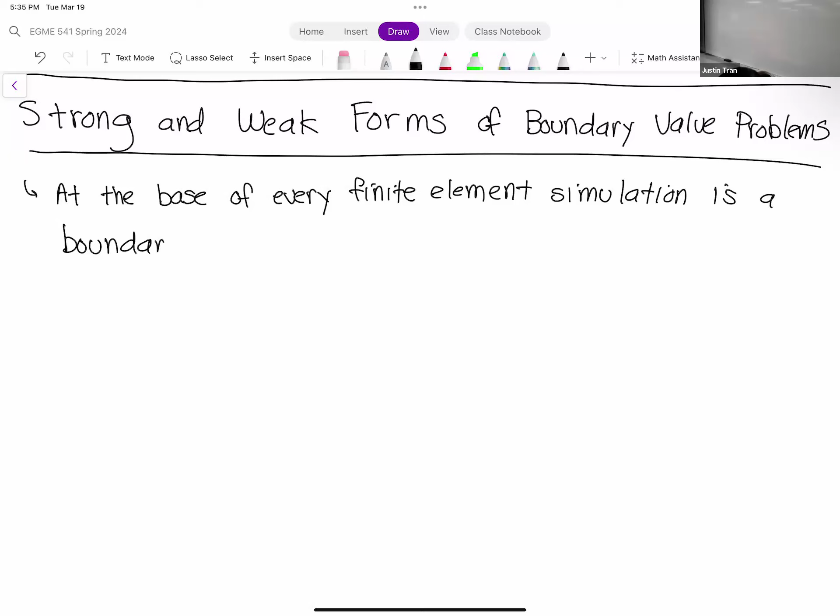And that includes our direct stiffness stuff too. It's just that for the direct stiffness stuff, we took a few shortcuts to get to things like the truss equation, the frame equation, things like that. Okay. So a boundary value problem essentially has three main components.

On the one hand, we have the geometry of the problem. So in a more traditional sense, in ANSYS, your geometry would be basically your CAD model, your digital representation of your geometry or the part that you want to simulate. The second component is the governing equations.

So whatever part you're interested in simulating, you want to simulate its behavior. And its behavior is often governed by some equations. More often than not, those equations are differential equations, oftentimes partial differential. And three is the boundary conditions.

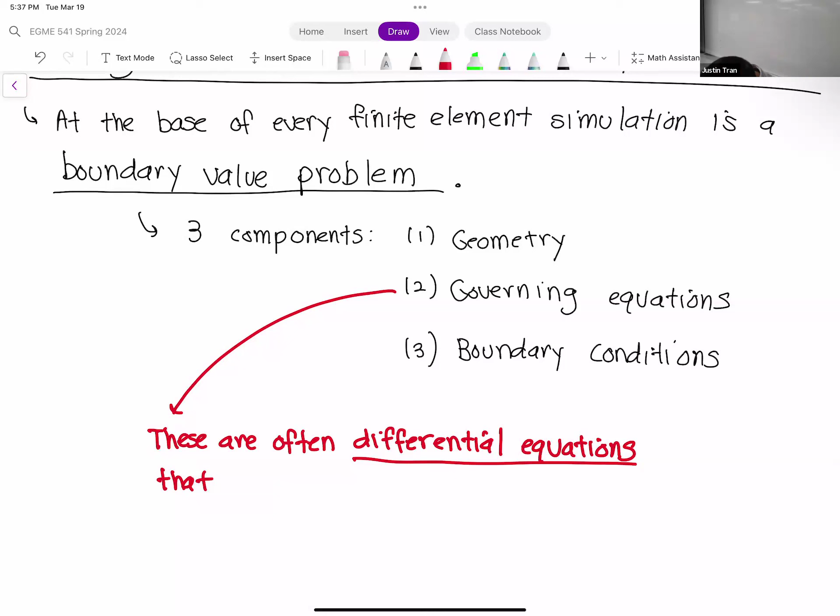The governing equations for a lot of physical phenomena, especially those that mechanical engineers deal with in their professional practice, are differential equations. And the thing with differential equations is that they are very difficult to solve, especially on an arbitrary geometry. So that was the main motivation of how finite elements came to be.

In the 17th, 18th century, scientists were starting to discover that a lot of the way that the world behaves can be governed by these differential equations. So they used first principles: conservation of mass, conservation of momentum, conservation of energy, things like that. And they developed really sophisticated equations. The problem is that they developed all these equations, but they didn't have a means to solve them on arbitrary or complex geometries.

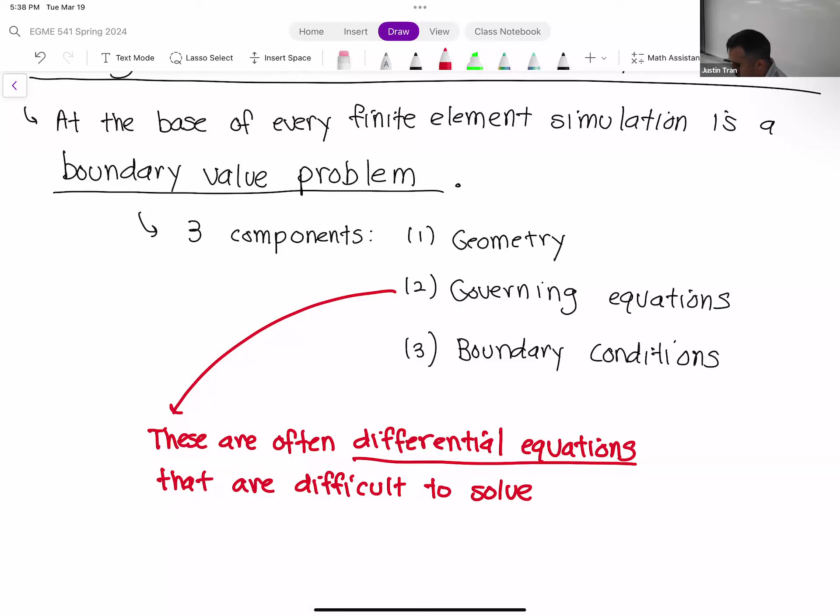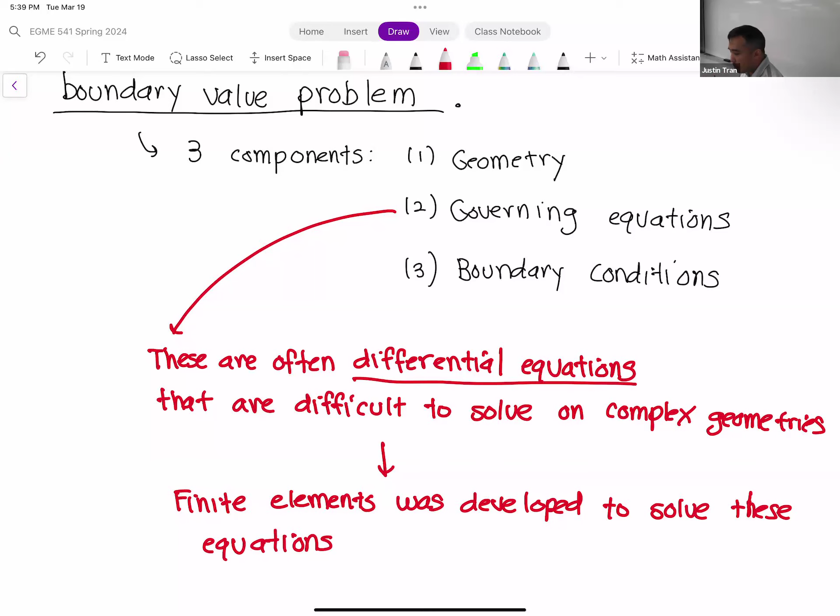So finite elements has its roots in applied mathematics. Finite elements was developed as a way to solve these differential equations. Through history, it's taken a lot of different forms, and now finite elements is very approachable, in the sense that it's widely applied in a lot of commercial software that a lot of people use, not in their everyday life, but in their professional life if they're an engineer.

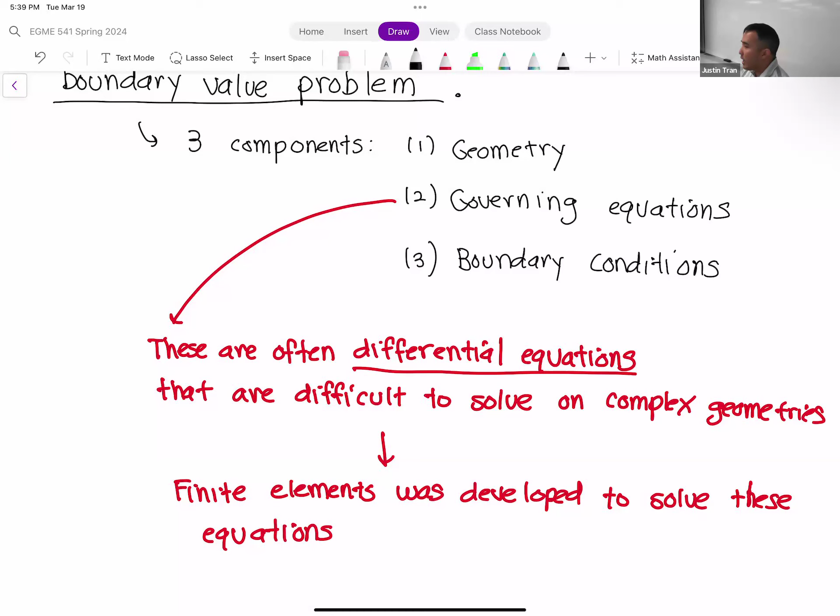So what we're going to be focusing on over the next few weeks is exactly this process of starting from a differential equation and how we obtain a finite element problem from that differential equation. Because that's really the piece that we've been missing.

Because through the direct stiffness method, we got a lot of practice in solving a finite element problem, right? Element stiffness matrix, assembly, boundary conditions, solution. What we haven't touched on at all is how we even obtain those expressions for the element stiffness matrices to begin with. All those element stiffness matrices that we've been working with for the truss elements, the beam elements, the frame elements, the springs, they have their roots in an underlying differential equation.

The reason we're doing this now is to show you that finite elements really is a very flexible framework. Not only can you solve structural problems with this, but you can also use it to solve thermal equations. Heat transfer is also governed by a differential equation, the heat equation. You can use it to solve for fluid flow; for fluids, we have Navier-Stokes. You can even solve electromagnetism. So finite elements extends far beyond the structural mechanics that we've seen in this class so far. As long as you have a differential equation, you can use finite elements to solve for its solution.

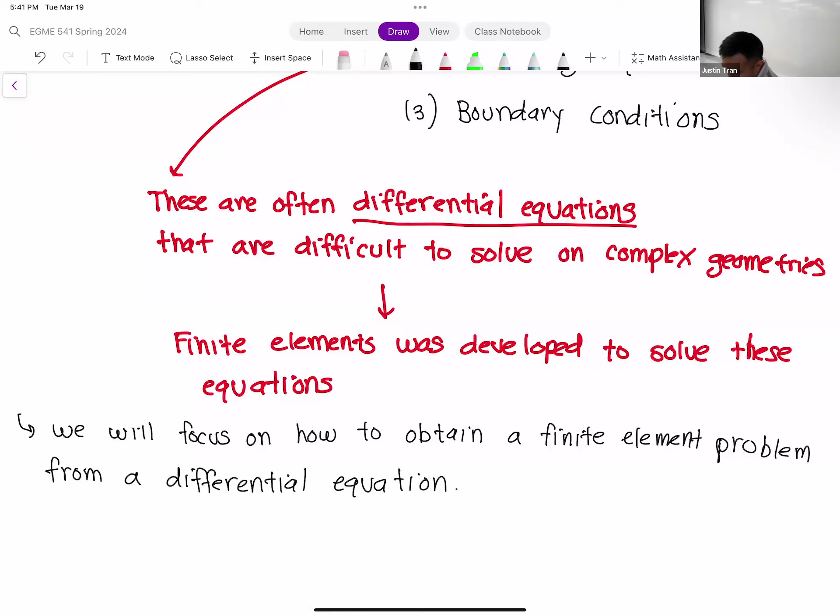And to do this, we need to introduce a couple new concepts. Right. So differential equations can often be put into several different forms to make it either convenient or less convenient to solve.

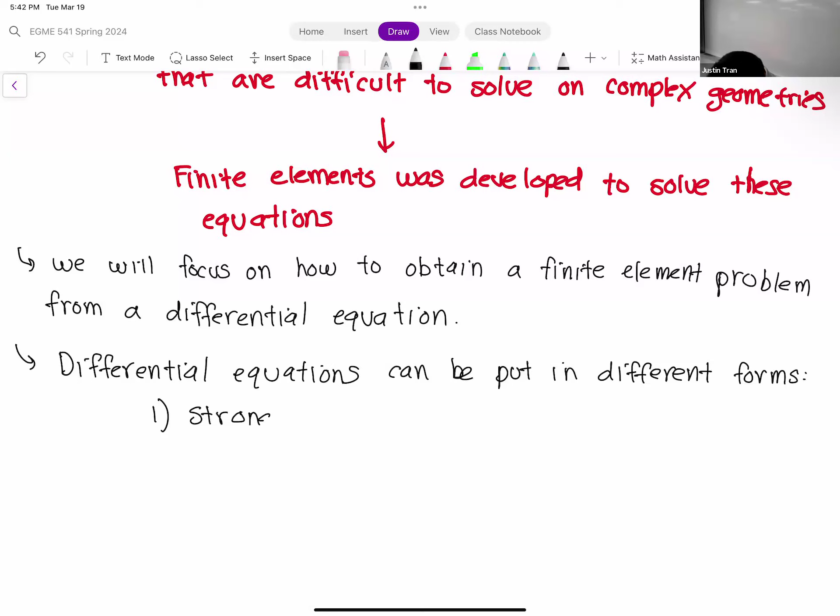We're going to present two forms today. The first form is called the strong form. The strong form is probably what you're most familiar with, the form of differential equations you've seen in most of your previous math courses. Or if you're taking 438, 538, that's more than likely what you've been presented with.

But we'll see that we can take the strong form and derive something called the weak form. The weak form of a boundary value problem, the weak form of a differential equation, facilitates our finite element solution. The weak form you've probably never seen before, because it doesn't really have a lot of applications outside of finite elements.

The plan for today is we're going to review the strong form, go over some solutions to second order linear differential equations, and then introduce the concept of the weak form and what that looks like. That's the motivation and purpose of where we're going for the rest of the class. Any questions on this so far?

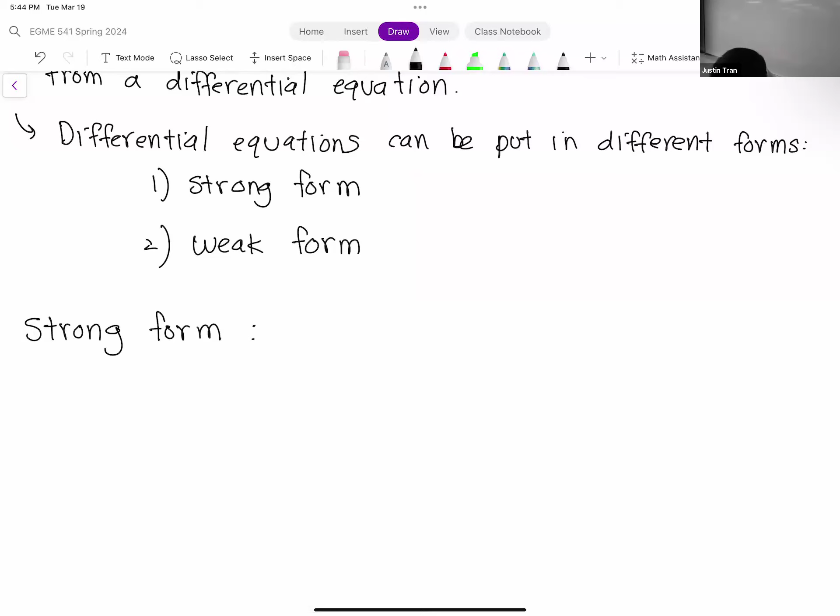Okay, so let's review some strong form. To illustrate this, I'm going to work on a very specific problem, which is 1D elasticity. Like I mentioned, the strong form is the more traditional, or more classical form for a differential equation.

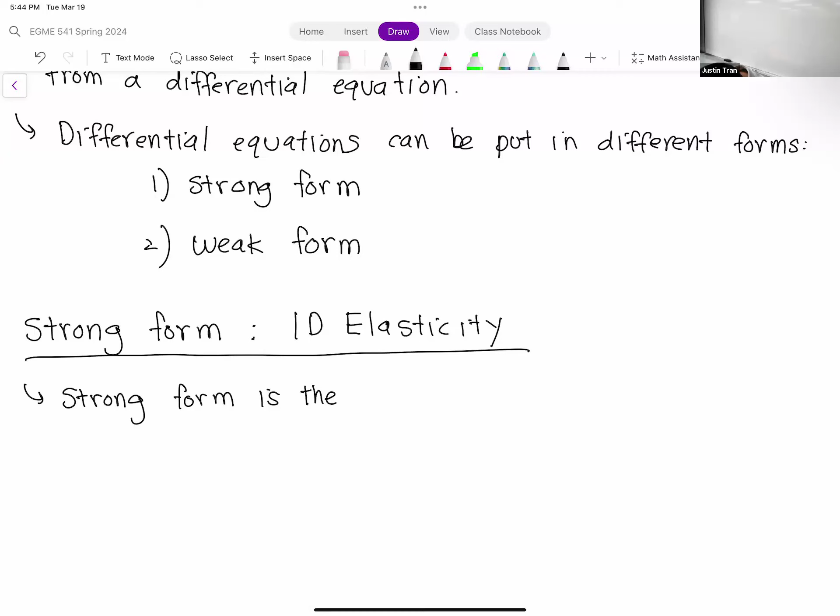The reason for that is because if you were to take your standard conservation law, conservation of mass, conservation of momentum, conservation of energy, when you apply those to physical situations, it just very naturally produces equations in this form.

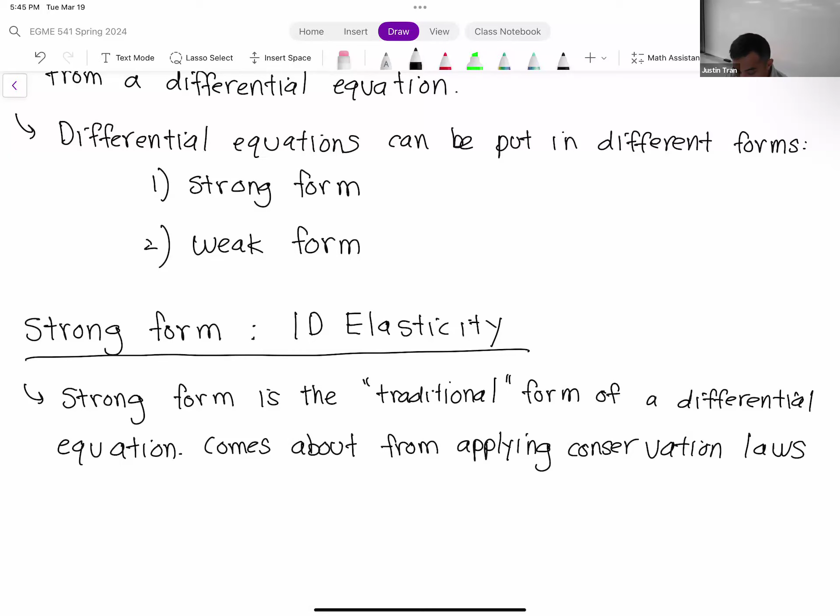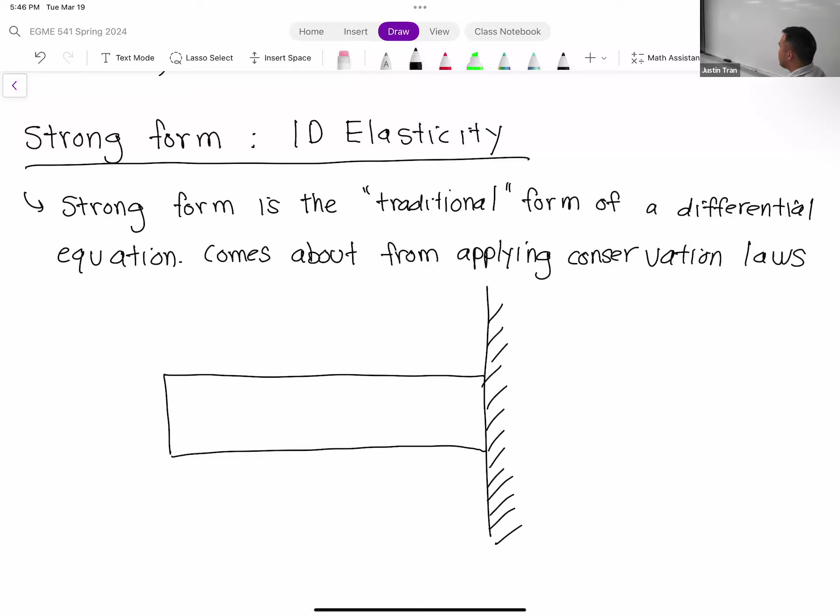I want to show you an example of this using 1D elasticity as the setting. So the 1D elasticity problem: let's say that we have a truss element like this. Let's fix it to the wall on the right side, and then let's apply a compressive stress on the left.

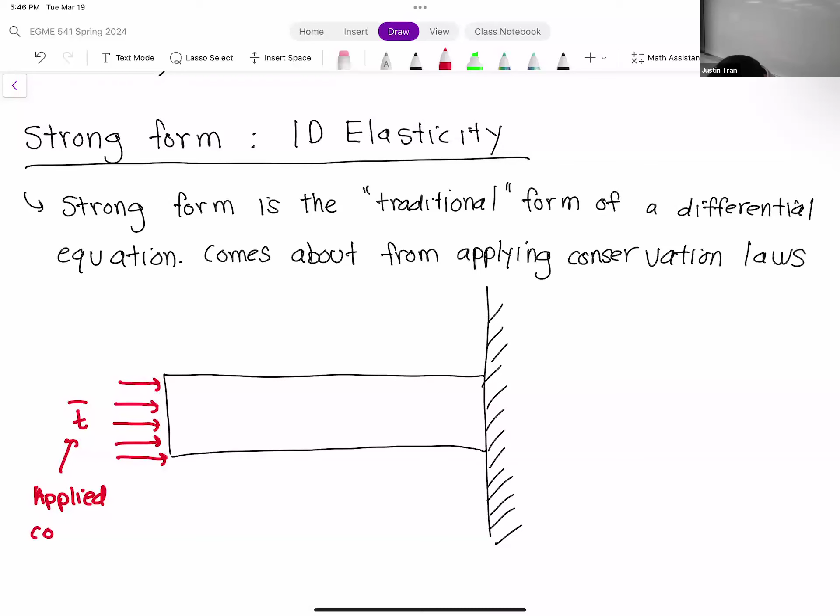The stress being applied on this side, just like that. This T here is an applied compressive stress.

So what we want to solve for in this case, or what we're interested in, is the distribution of displacement within this member.

Intuitively, what we expect is that if you take a structural member like this and apply a force to it, the entire structure, because of elasticity, is going to deform. We expect the structure to kind of squish close to the wall, very similar to what we had for ANSYS activity 2, except we're applying the force parallel to the structure instead of perpendicular.

So this function, or what we're solving for essentially, is a function u of x, where u of x is going to tell us how much deflection or displacement we're going to experience in the rod as a function of distance x.

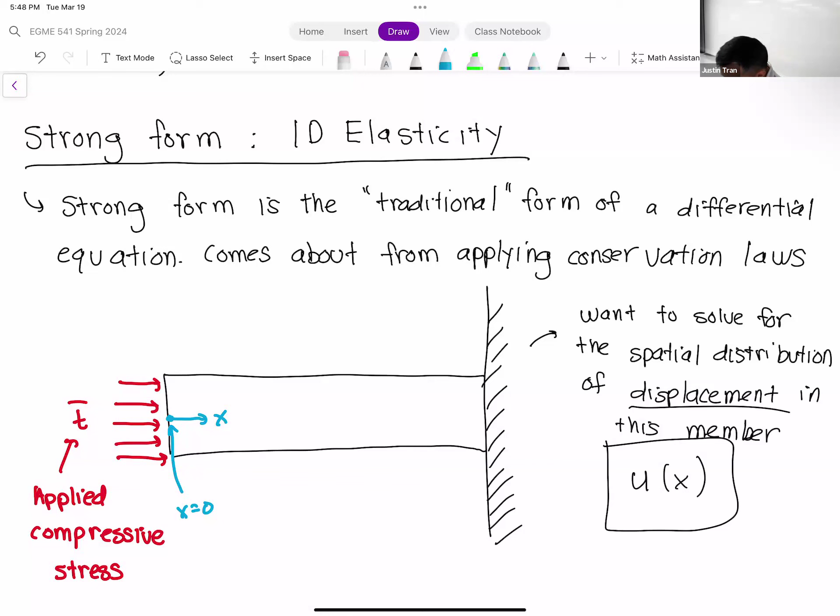What we want to solve for here is a continuous function, u of x, that tells us what the displacement is as a function of x. So let's say that this rod has a length L.

Additionally, one thing we haven't considered before is let's assume there's some kind of body force inside the rod. So in green right here, I have B of x, which is some body force. If you've never heard the term body force, it's a force that's felt throughout the entire volume, or on the interior, of the structure.

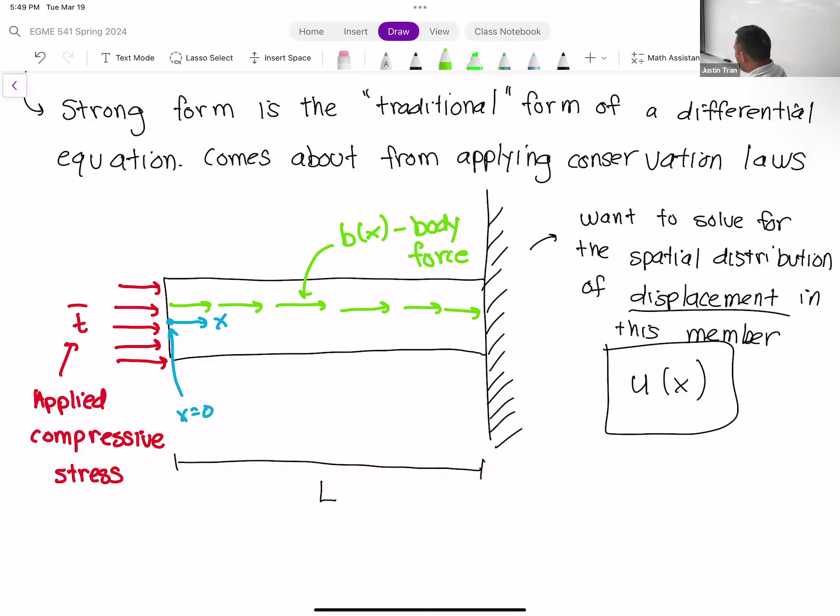There's a very classical body force that everyone experiences every day of their life at every moment, which is gravity -- the force that pulls you down towards the surface of the earth. That is what we call a body force, kind of an internal force that pulls you in a certain direction.

It might seem strange to have a body force that goes horizontally like this, but another classical body force is an electromagnetic force. Maybe this rod is electrified, or made of some metal, and there's a magnetic force pushing it inside or pulling it out. The exact origin of the body force isn't that important in this case.

We just have to account for its existence, just so that we can account for it in our equations. So that's the situation we're working with now. The first thing I want to do here is derive the equations. I typically don't do this in this class, but I think it's important to see it at least once, so that you can see the origin of a strong form.

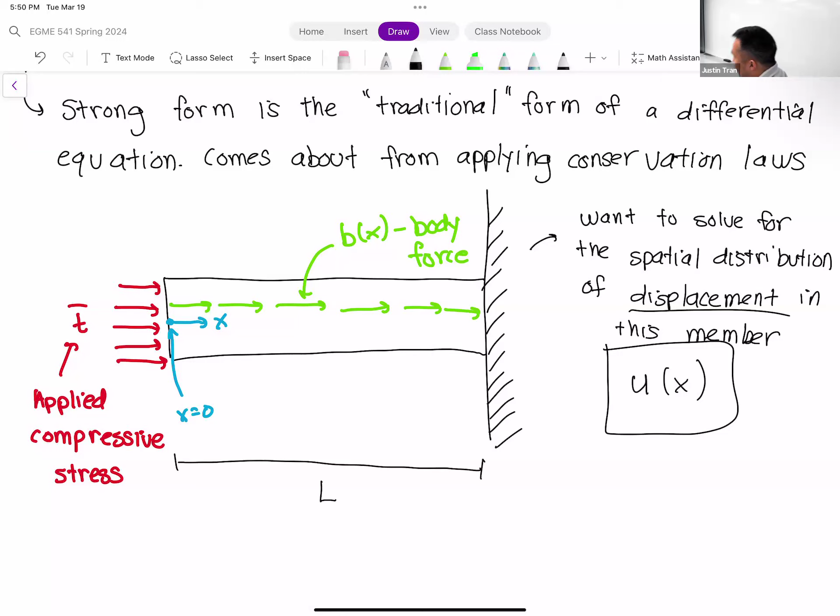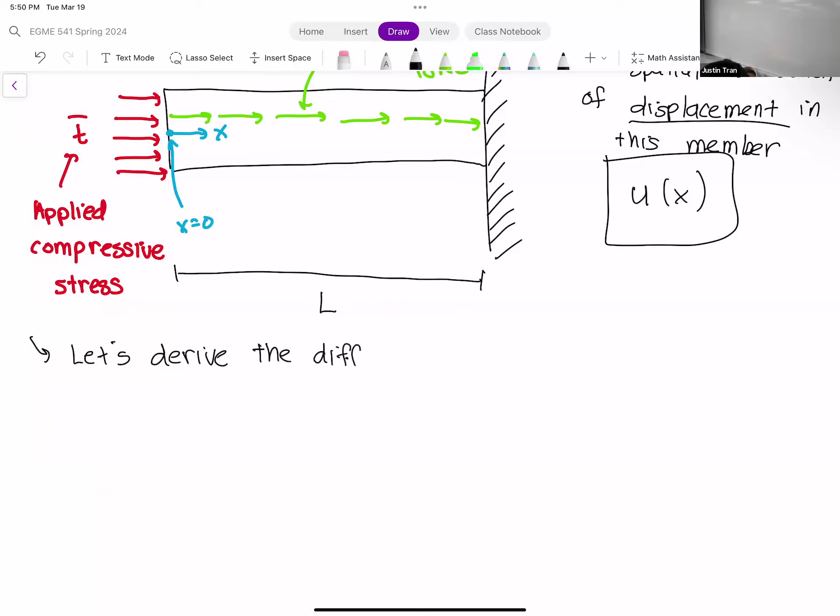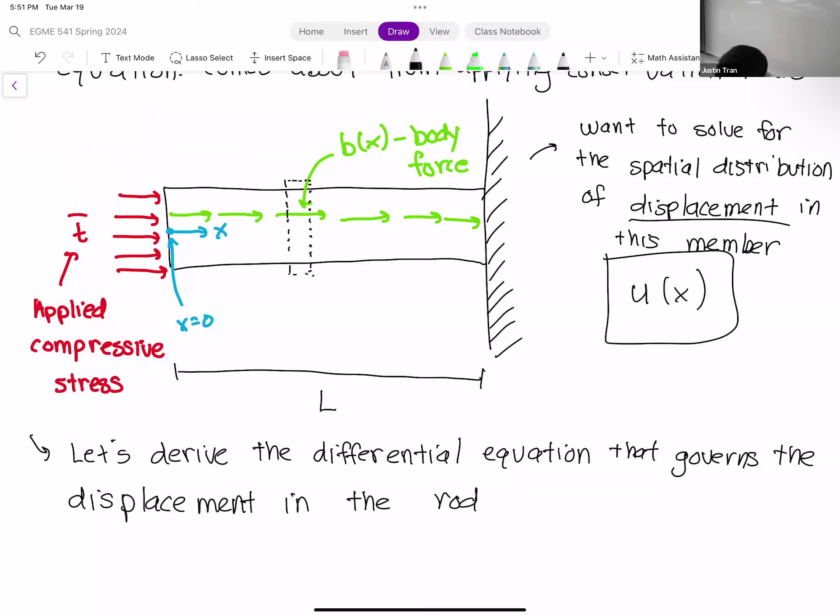So let's derive the differential equation that governs the displacement within the rod. To do this, let's take a small slice from the rod. I'm going to draw a dotted box right here. This box represents a small slice, and let's blow that up right here.

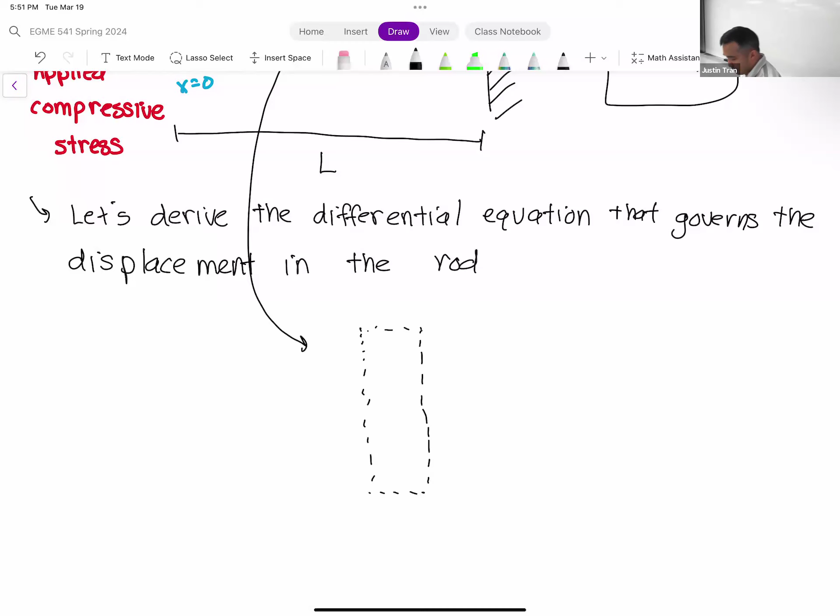This is a small internal slice within the rod itself. With elasticity and elastic equations in general, every single part of the rod must be in static equilibrium. Let's use that to our advantage here. Static equilibrium essentially means that if you sum up all the forces on this slice, the sum of the forces must be equal to 0.

So what are the forces on our slice here? Remember, we took this slice on the internal part of the rod itself. When you take a slice of a structure that's under stress, we've seen this in ANSYS: whenever you apply external forces to a structure, internal stresses develop. Think back to our first ANSYS activity, when we applied a force onto that plate, we saw a stress distribution within the plate. Same thing with ANSYS activity 2. We applied forces to that bike crank, and we saw the stresses develop on the interior.

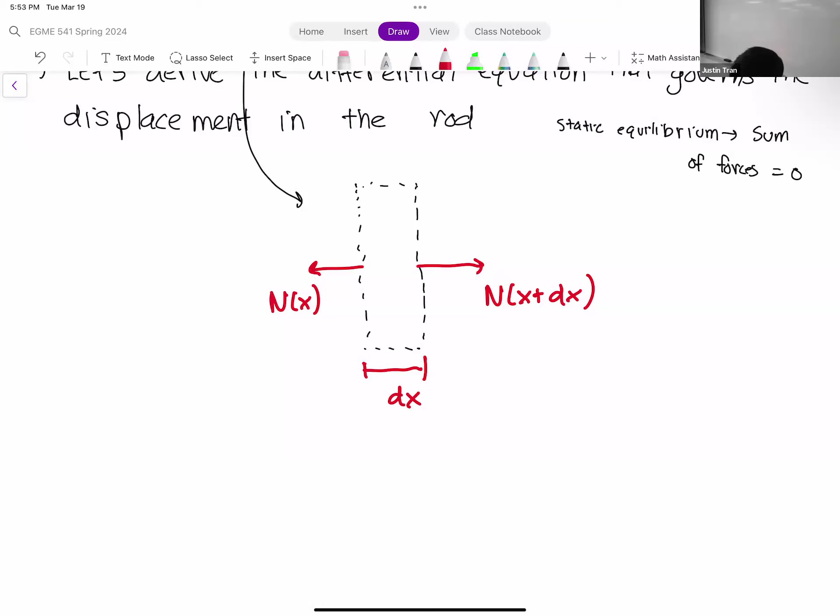I'm going to label 2 stresses here, 1 going in this direction and 1 going in this direction. On one side, I'll call that force N of x. On the other side, we draw a force N of x plus dx, where the width of the slice is dx. These are internal forces that develop within the member, mostly to keep the structure in static equilibrium.

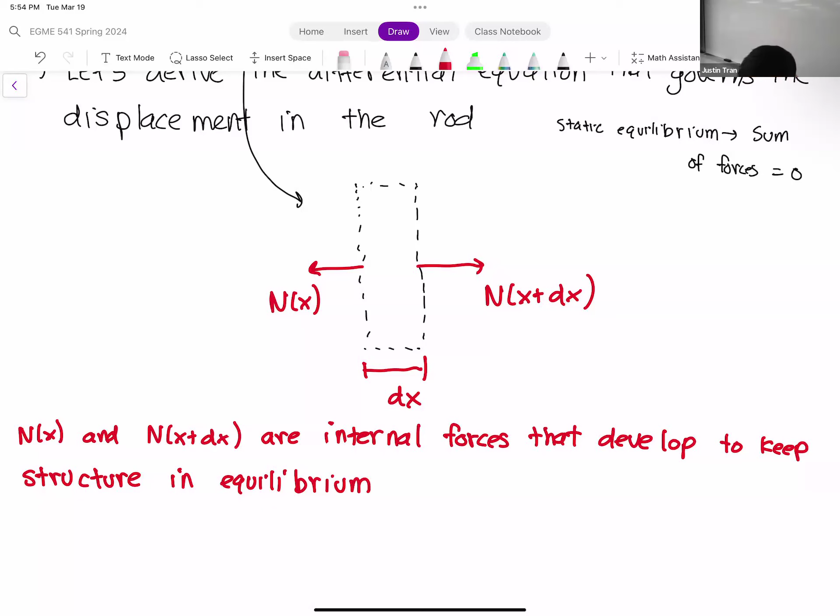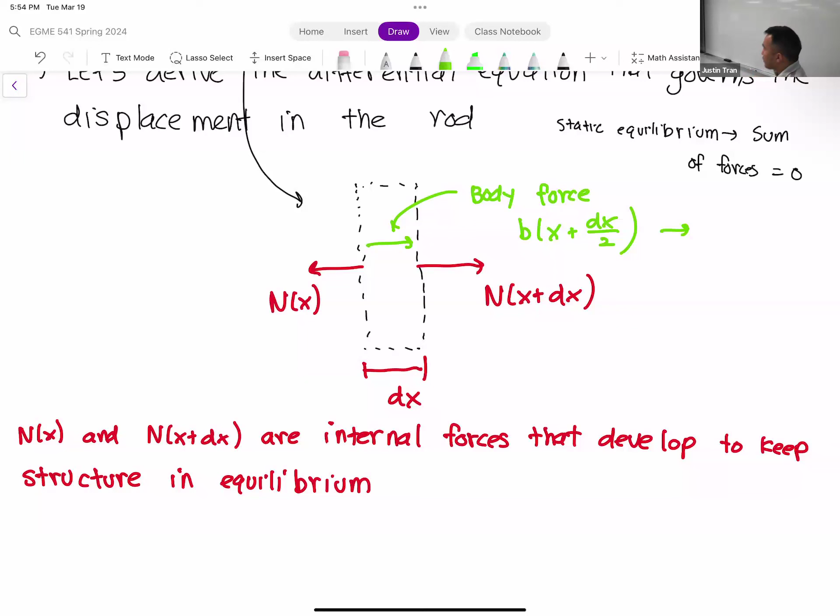So we have an internal force on the left and an internal force on the right. They may be different, which is why we have N of x plus dx. And then we also have the body force, B of x plus dx over 2. If you're curious about the units for this body force, it's a force per length. That's usually how body forces are defined: some force divided by a length, an area, or most commonly a volume.

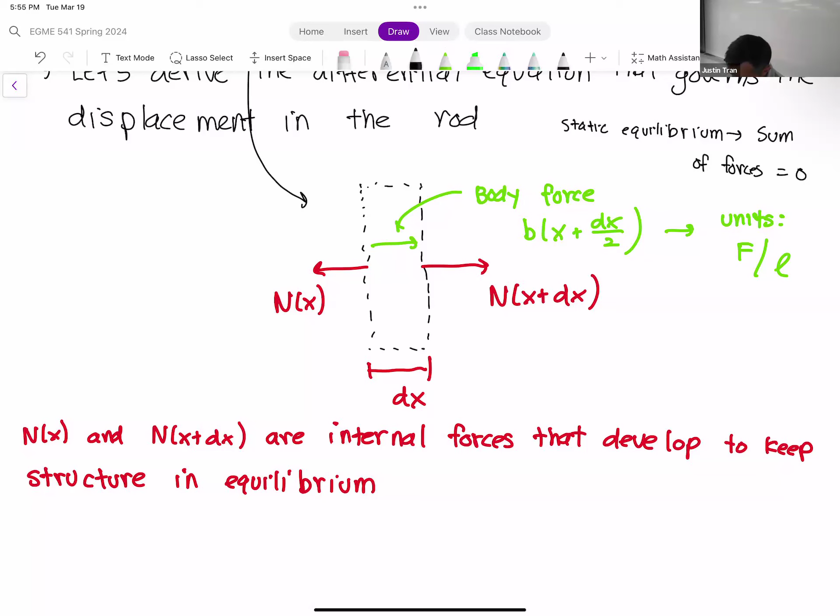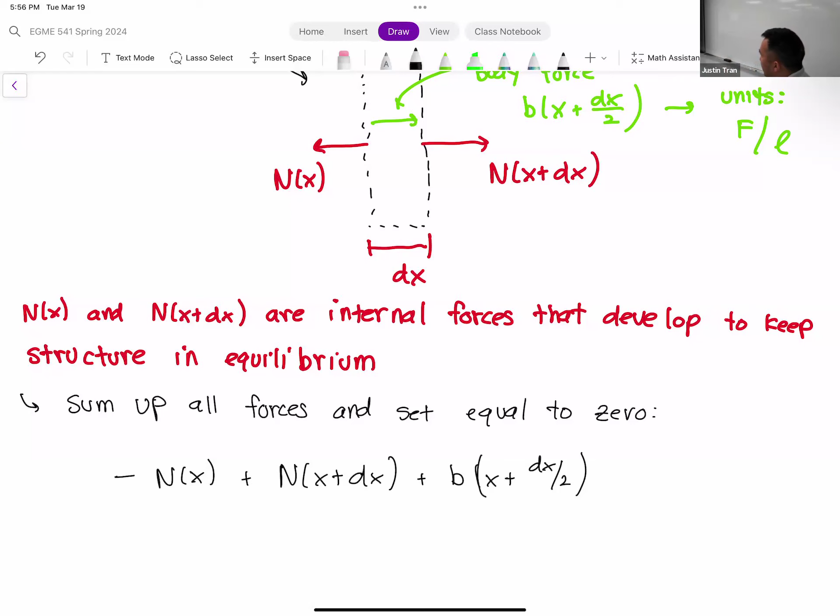Now we have 3 forces here, so let's sum up all the forces in this diagram. First we have N of x, a force going in the negative direction, so we have minus N of x. Plus N of x plus dx, which goes in the positive direction. Then we have our body force term, B of x plus dx over 2, and to transform it into units of force, we multiply it by dx.

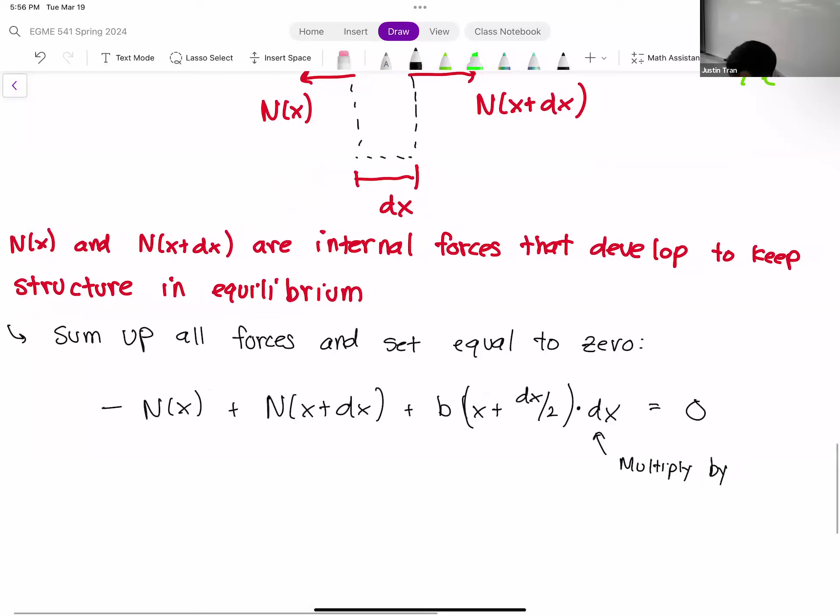We multiply by the length to get this into the units of force. From here, we're going to work on this equation algebraically a little bit. Let's divide the entire equation by dx and rearrange the terms. We have N of x plus dx minus N of x, divided by dx, plus B of x plus dx over 2, is equal to 0.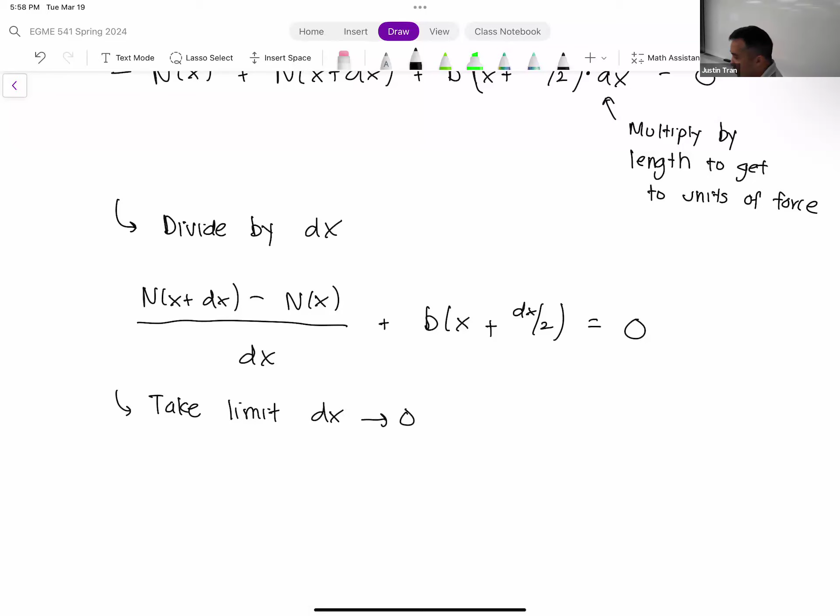So our first term there, our fractional term, looks very similar to a derivative. And in fact, we can turn it into a derivative by taking the limit. So we're going to take the limit of this expression as dx approaches 0. We're going to make our slice much, much smaller, so it's infinitesimally thick. What that does is take our first term and turn it into a derivative. So this is the instantaneous derivative right at that slice. So it's dN/dx, plus

Then we have our function b of x plus dx over 2, right? As we take the limit as dx approaches 0, this just becomes b of x, and this is equal to 0 here. All right. And so through that exercise, you can see that we basically took our structure, applied a very simple force balance, took a limit, and what we have here, before we even knew it, is a differential equation.

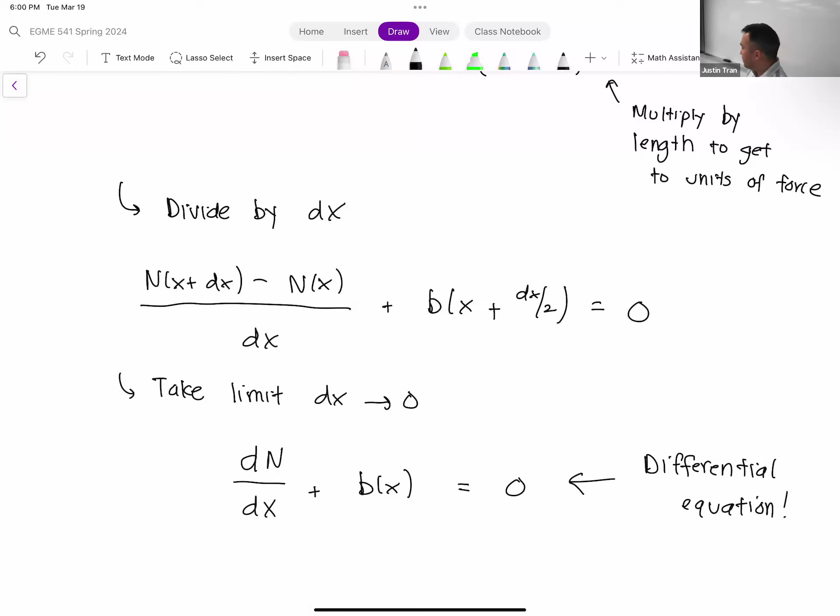So this differential equation governs the elasticity of our rod. What we can say here is that the derivative of the normal force, or internal force, with respect to x, plus the body force b of x, is equal to 0. All right. Any questions on this and how we got to this point? Okay. All right, so we have a differential equation.

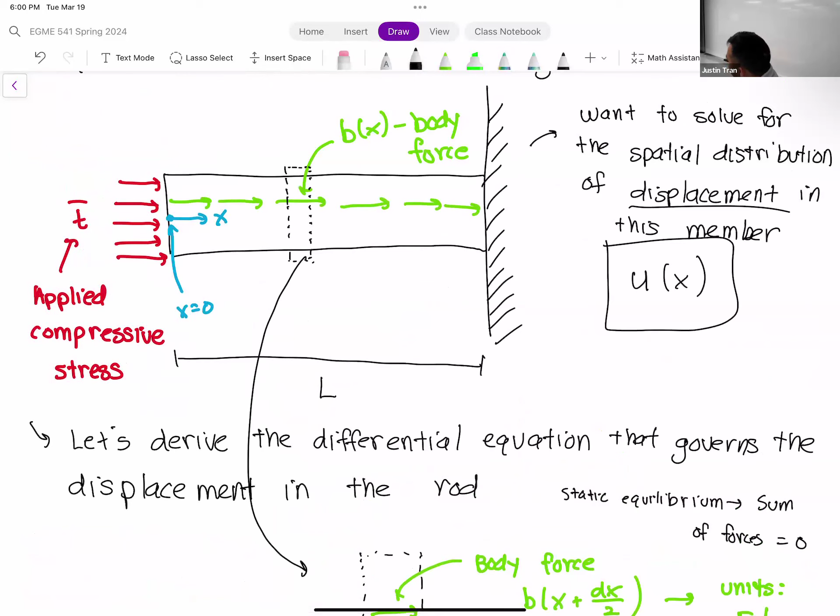It's not the most useful differential equation, because if you remember when we started this, what we're looking for is an equation to represent the displacement u of x. So let's work on this equation a little bit, because we were able to derive it from first principles. Let's see if we can massage this equation and substitute some terms in order to obtain our displacement. In particular, let's look at our normal force, or internal force N. This is a force that develops on the inside of our structure, right? So let's plug in for this.

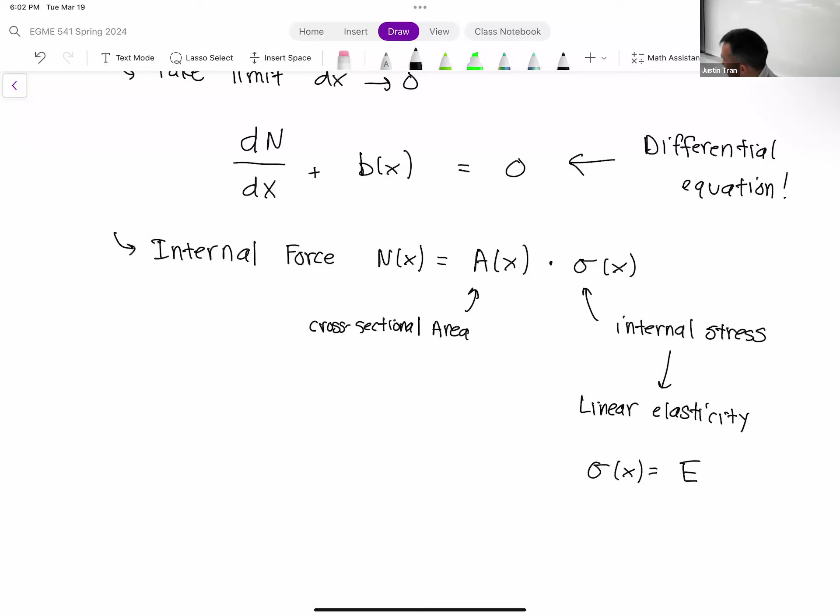Our internal force is the same thing as multiplying our cross-sectional area of our structure by an internal stress. Actually, let me label this area right here as the cross-section. Right, so we have a force equal to an area times a stress. The units work out. In particular, let's take our stress and plug in our typical Hooke's law, or linear elasticity. For stress, sigma of x is equal to E, which is the Young's modulus, times epsilon of x. So we have stress equal to Young's modulus times strain. That's our typical equation there.

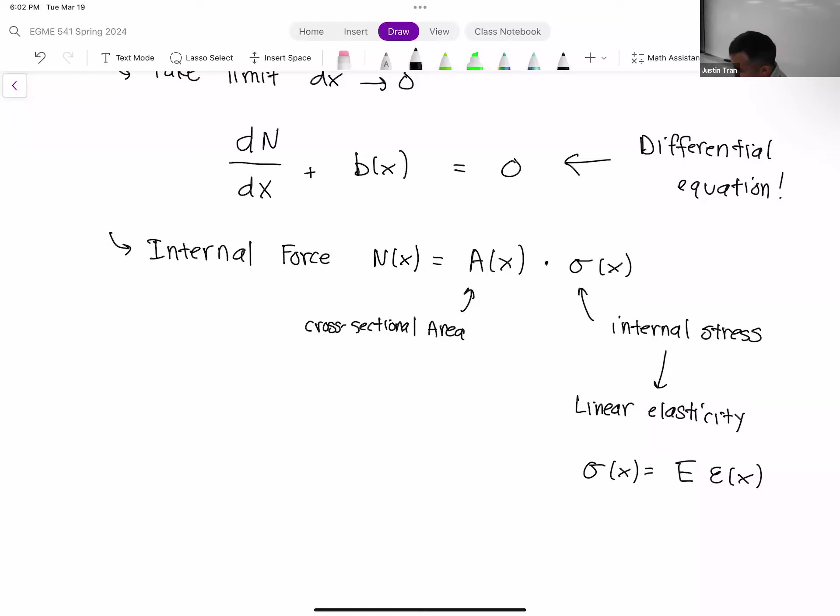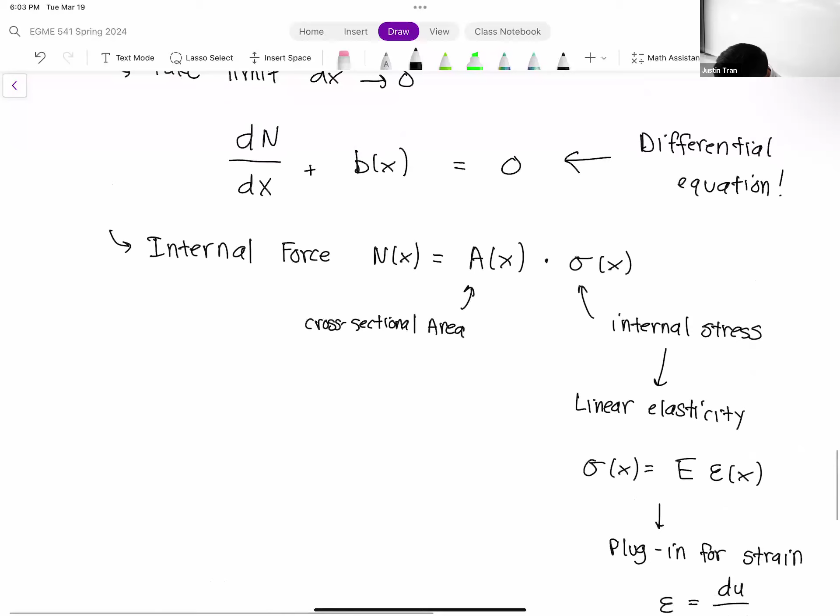And then from here, we're going to plug in for the strain, because we know that strain epsilon is equal to the derivative of the displacement, so we have du dx. That's just the definition of strain. All right. So if we plug all those in, then what we get is the internal force N of x is equal to area multiplied by E multiplied by du dx.

All right, so now that we have an expression for the internal force, let's plug this back into our differential equation. We plug that in and we get d dx of area. Remember, area can be a function of x, so the area can change. Let's say you have a tapered rod, or a rod that changes cross-sectional area. We can account for that in this equation. Multiplied by E. It's not really common for the Young's modulus to change, because usually you have a structure made of one material. But technically speaking, if you have some kind of weird composite material, then you can account for that here as well.

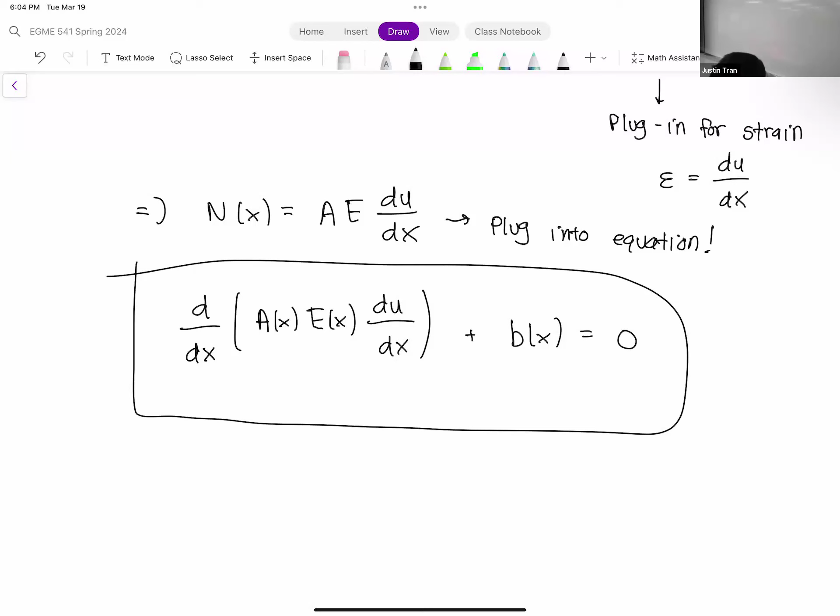Then we have our strain. So our strain is du dx. We are able to get u into our equations. We're able to get our displacement here. So that's really good. Then we add our body force term, b of x, and then all that is equal to 0. And this right here is our 1D elasticity equation.

All right. So just to dissect this a little bit, we essentially have a second order differential equation that we can use to solve for the displacement. How is it second order, you ask? If you look at this first term, you can see that we have an x derivative on the exterior, and then when we apply that to the interior, this becomes a second order equation, right? Of course, if we have terms where the area changes as a function of x, then that's going to make our equation more complex. But the total number of derivatives for our solution is 2. So that makes it a second order equation. We can now take this equation and solve for its solutions. But in order to do that, we also have to apply boundary conditions.

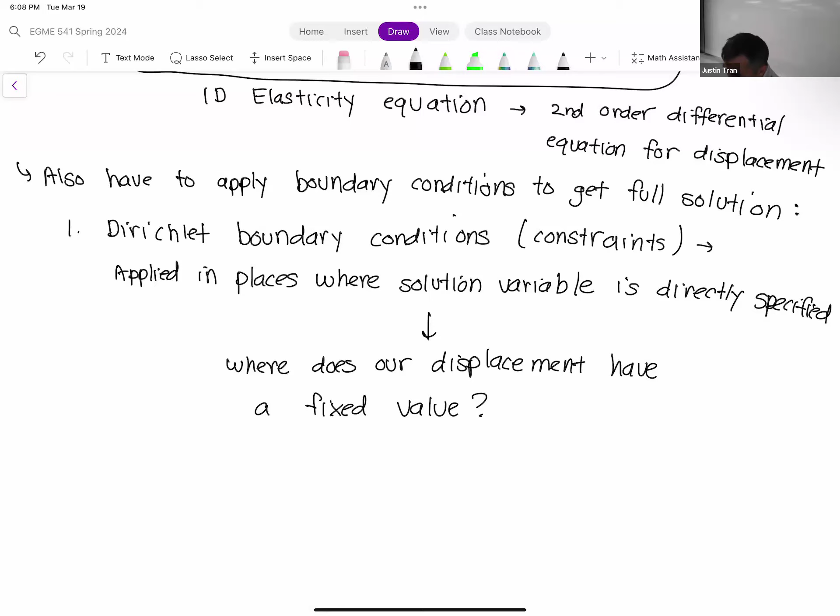Okay. So let's look back at our problem geometry and see kind of where those locations are. So if you go back to our problem geometry here, okay, we can see that our bar here, or our truss, or our structure, or whatever, is fixed to the wall on the right side. Okay. And what does fixed boundary condition mean? Fixed boundary conditions means that the displacement is going to be 0. In particular, because we have our coordinate system here, what we can say is that the displacement at x is equal to L is going to be equal to 0. Okay. We can say u at x is equal to L is equal to 0. Okay. So that's our Dirichlet boundary condition on one side of our equation.

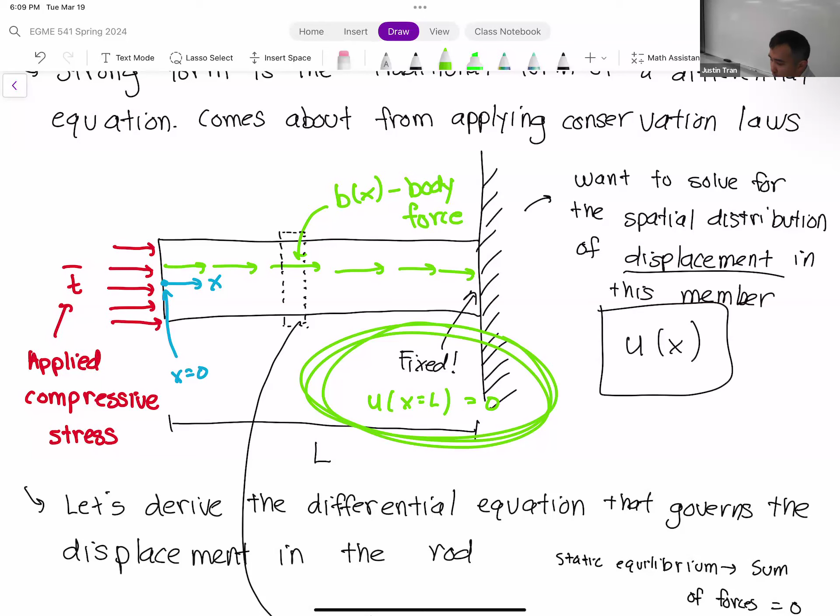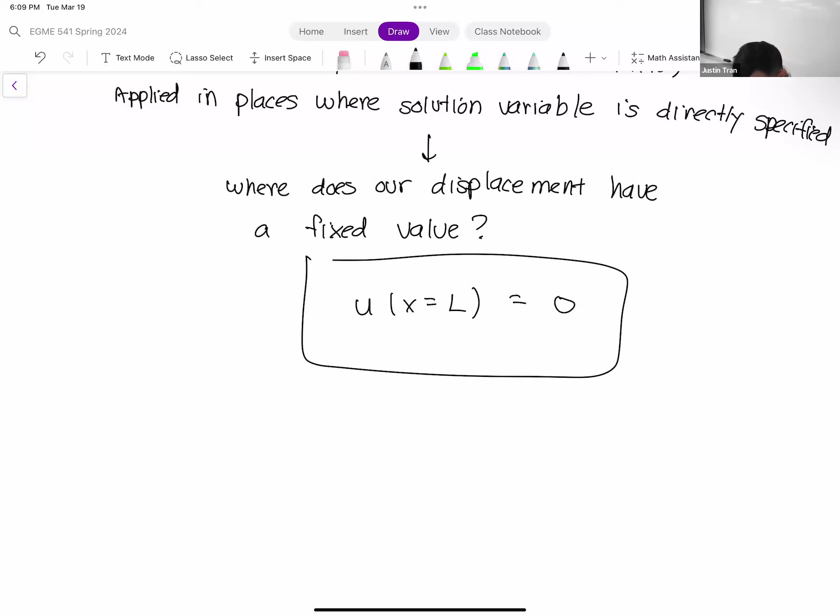Okay, so let's go back down here. And so our Dirichlet boundary condition is u at x is equal to L is equal to 0. Okay. We're directly specifying the value of the solution at that location, and we're directly specifying it to have a value of 0. Okay. So Dirichlet boundary conditions are pretty straightforward, and actually, they're more straightforward to apply in this form than they were in direct stiffness. Okay.

All right, so let's look at our Neumann boundary conditions. So these are traditionally our loads. Okay, so our Neumann boundary conditions, the way we kind of defined these before was that these are conditions that don't directly specify a solution value, but they do affect the solution. Okay. And what you'll see is that now that we're looking at the differential equation side of it, the Neumann boundary conditions are going to take kind of a more specific definition. Okay? Because this definition is okay, but it's kind of vague. So you'll kind of see what I mean here.

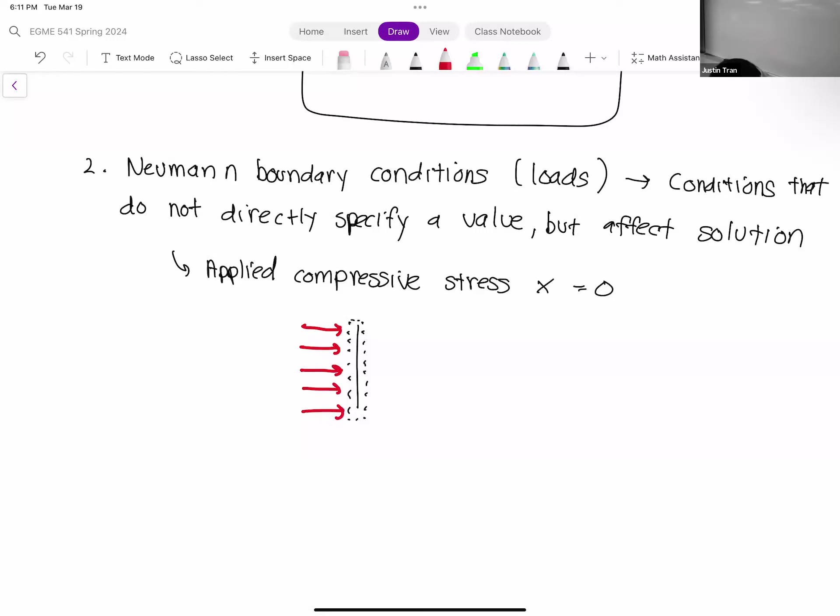Okay. So our Neumann boundary condition in this particular case is an applied compressive stress on the left side of the wall. Okay. In other words, we have an applied compressive stress at x is equal to 0. Okay. And so if we draw that out, and in fact, let me draw it like this. Let's draw a free body diagram here. Okay. So T bar there is our applied compressive stress, right? There must be equilibrium, right? So there must be equilibrium everywhere. And so to oppose this, we have N of 0, where N of 0 is the internal stress at x is equal to 0, or internal force at x is equal to 0. Okay.

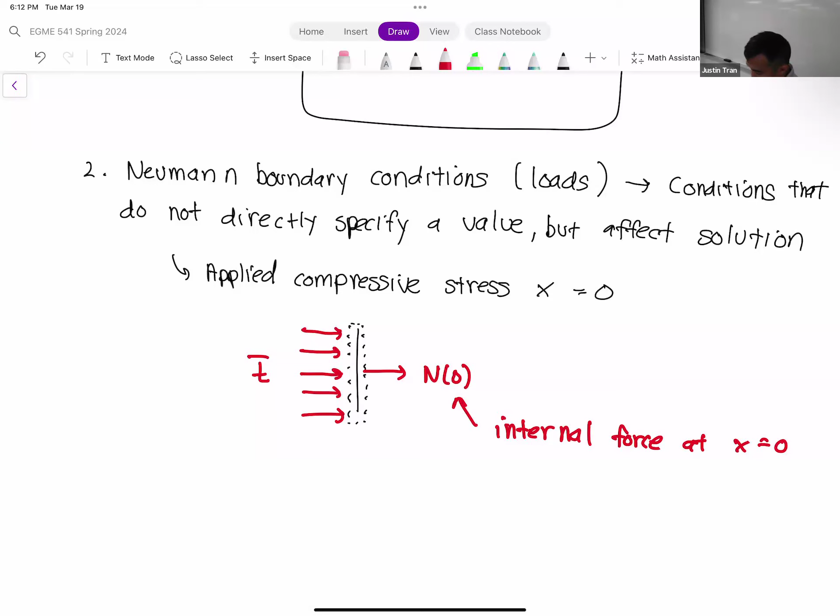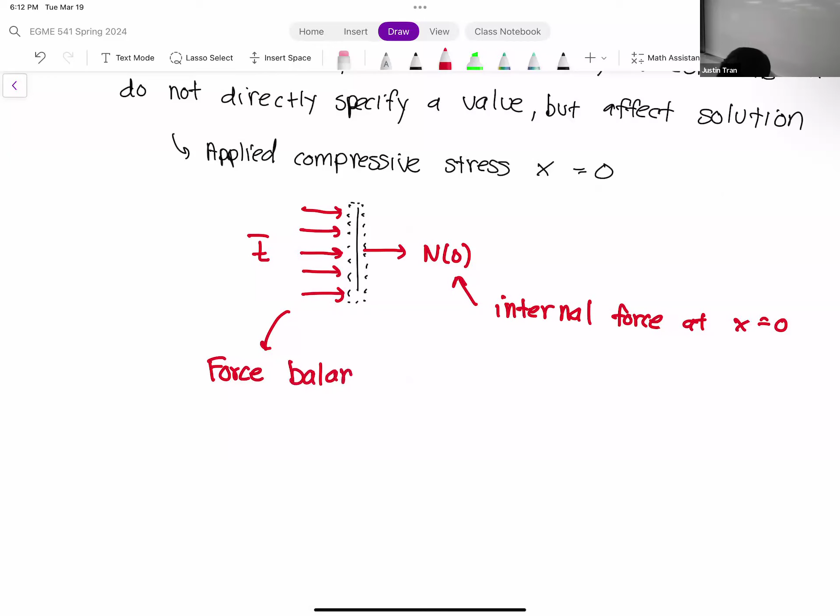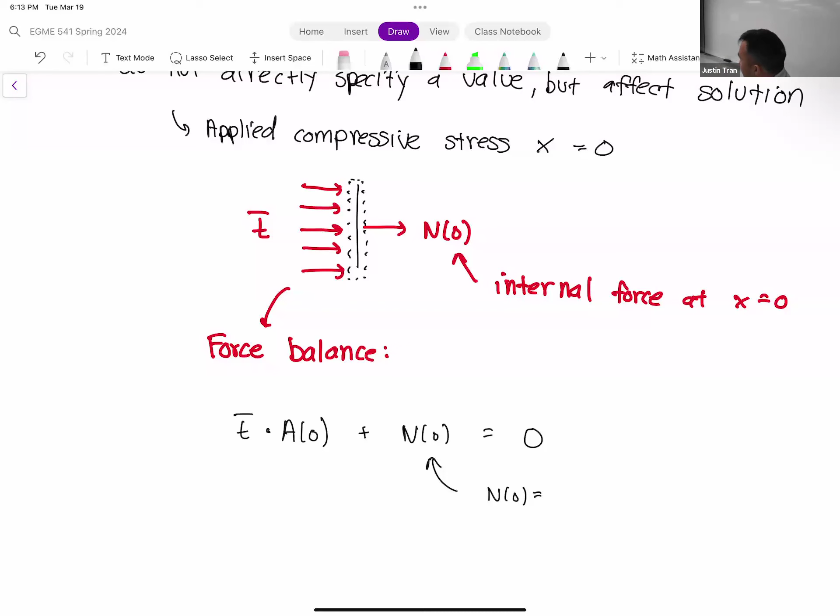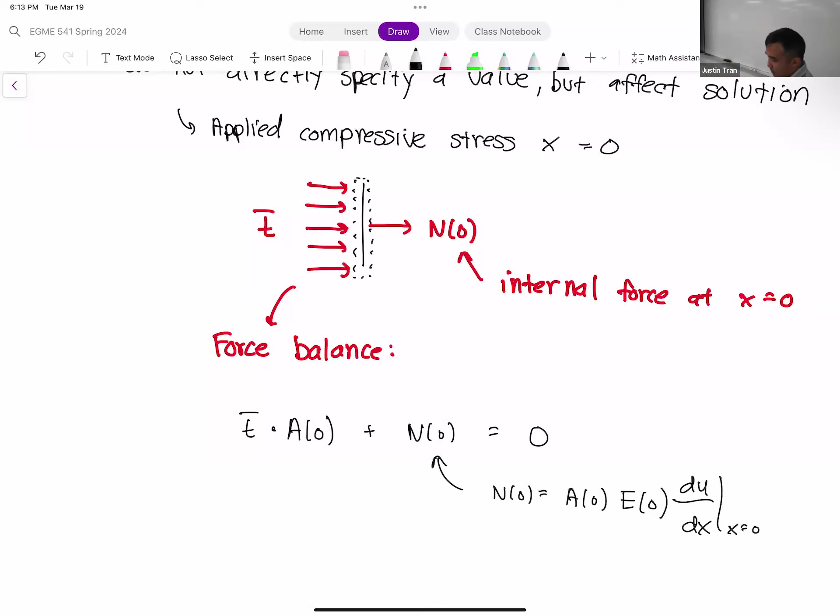All right. So let's make our force balance, right? So under our force balance, we have T bar, okay? T bar here is a stress, and so to get a stress into a force, we have to multiply by area, okay? So T bar multiplied by the cross-sectional area at x is equal to 0. This must be equal to, of course, you know, there's a sign change here, but you know, we'll assume that's all good. Okay. Actually, no, let's do this properly. Okay. We have T bar times A0 plus N of 0. This must equal 0. Okay. Let's plug in for N of 0. Okay. And so if we use our expression before, the normal force is equal to the cross-sectional area, A, multiplied by the Young's modulus, E, multiplied by the strain, du dx at x is equal to 0. Okay. And so we plug that expression in, we get T bar times A of 0 plus A of 0, E of 0, du dx at x is equal to 0. All that's equal to 0 there.

Okay. We have A of 0 in both terms, and we have this equation equal to 0, so we can divide the entire equation by A of 0, cancel that out. Okay. And so if we work on this algebraically a little bit, we move the T bar to the other side. What we get is quantity E times du dx. Okay. Both of these are evaluated at x is equal to 0. These are going to be equal to minus T bar. Okay. So this right here is our Neumann boundary condition.

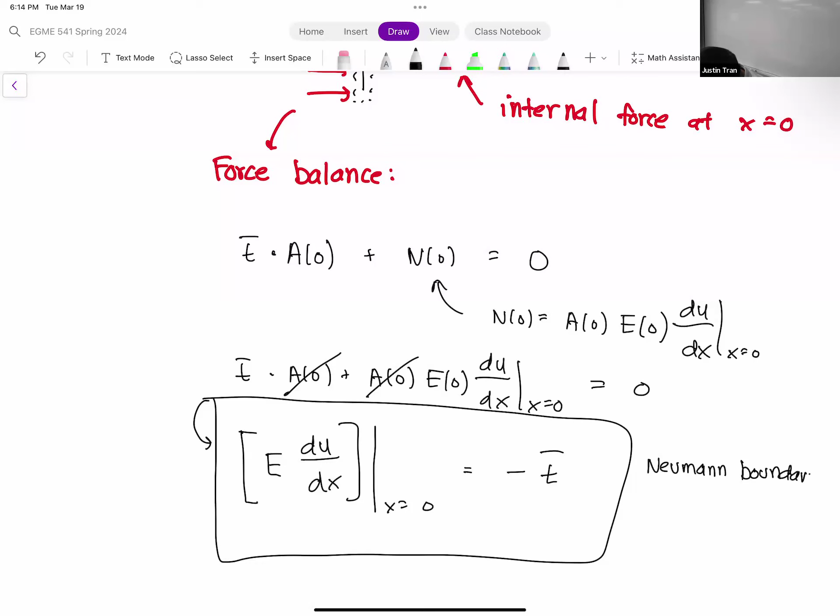Okay. Any questions on how we obtain that result there?

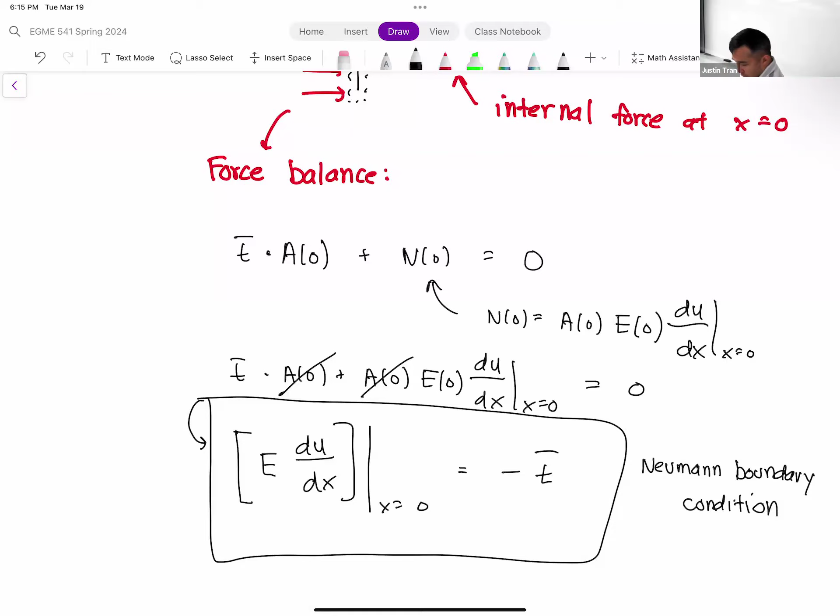One thing I want to highlight here, and it kind of expands our definition of Neumann boundary condition a little bit, is that this boundary condition here involves the derivative of our solution.

Whenever you mention a Neumann boundary condition or a load type boundary condition, mathematically what's happening is a relationship between the derivative of the solution and some kind of applied force. That's the more precise definition of Neumann boundary conditions, that it involves the derivative of the solution in one way.

Now that we've stated the mathematical form of the boundary conditions, along with the governing differential equations, we are ready to state the full strong form of our equations.

The strong form is comprised of three different equations, all coupled together. On one hand, we have our governing differential equation, which governs the behavior of our structure throughout its member. That was d/dx of E times A du/dx plus b of x is equal to 0. We call this our governing equation.

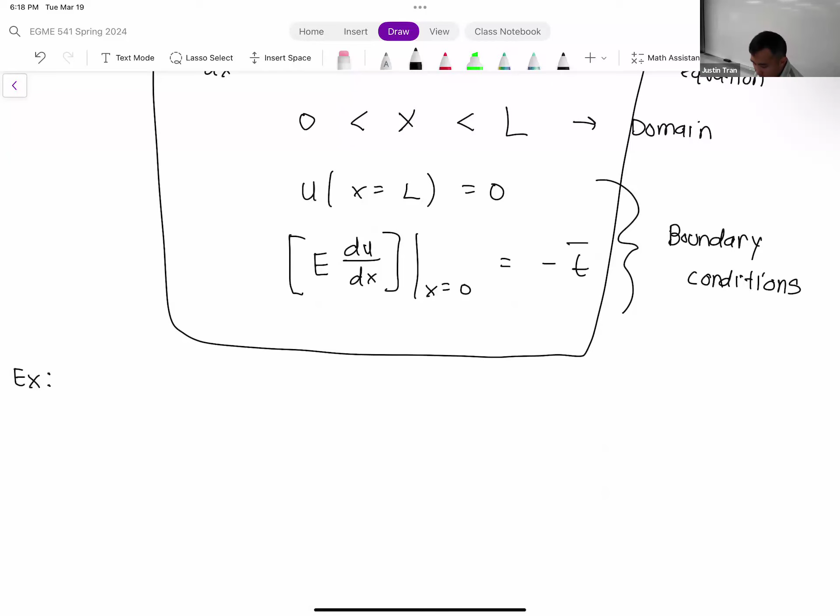Let's do a very simple example. Let's consider the following structure: let's say we have a bar here, and we'll say it's fixed on one side.

Sounds like a party.

On the other side, we're going to be applying a pressure force. This geometry is a little bit different than what we had previously. Previously we had the fixed constraint on the right side; this time we have the fixed constraint on the left side. Last time we had the pressure boundary condition on the left; this time we have it on the right. But we can still apply the same methodology here.

Let's say that the total length of this structure is 1 meter. We need values for the Young's modulus, so the Young's modulus here is 100 kilopascal. And the cross-sectional area is 0.1 meters squared.

With this information, let's solve for the distribution of displacement within the structure — essentially solving for u of x.

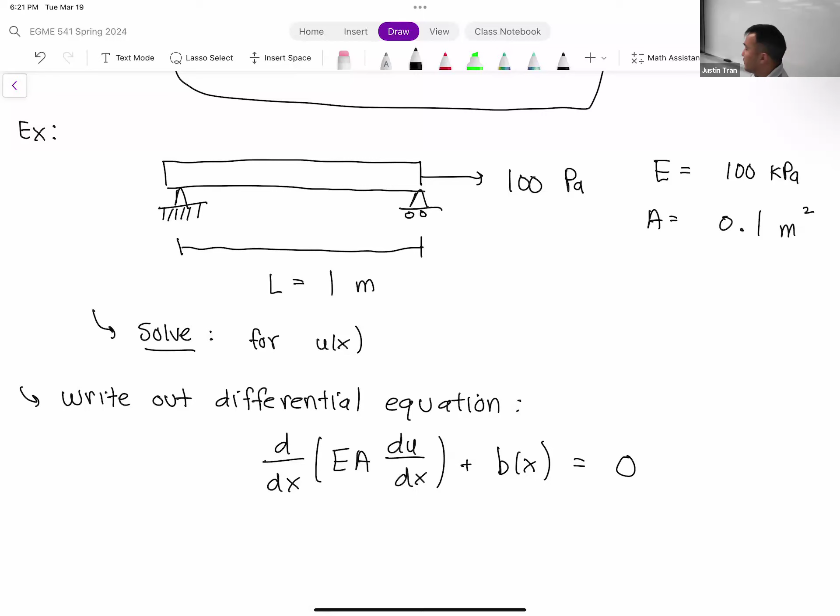This is our most general form of this differential equation, but a lot of times you can simplify it based on your specific problem. In this case, we don't have any body force — the problem didn't mention anything about electromagnetic force. Our rod here is horizontal, so there's no gravity force, at least not in the x direction. So we can say this is equal to 0, no body force.

The other thing we can say is that the Young's modulus and the cross-sectional area are constant in this case. If you look back at the problem, E and A have a fixed value. If those were functions of x, or if those were going to vary, then we'd have to take their derivatives, but since these are constant, we can pull them out of the derivative.

If we do that, then our differential equation here is E times A, times d/dx of du/dx, which is a second derivative — so this is d squared u dx squared, and that's going to be equal to 0.

We can simplify this a little bit more. We know that since E and A are non-zero, we can divide both sides by that. Divide by EA, divide by EA. This, of course, is just going to cancel out EA. And so our differential equation actually ends up simplifying quite a bit. We have d squared u dx squared is equal to 0.

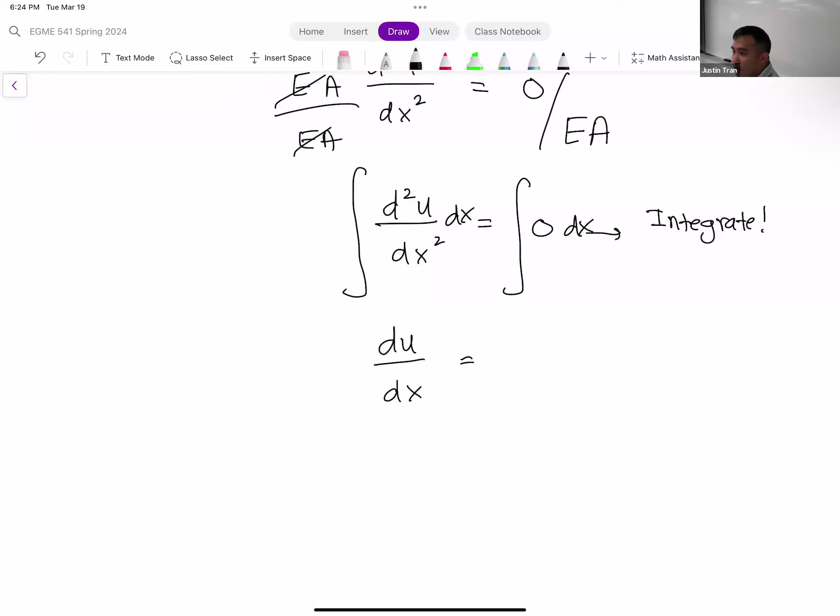On the right-hand side, we have the integral of 0, which is just 0. But since we are doing an indefinite integral in this case, our integrals don't have any bounds, we need to add an arbitrary constant. And so du dx is equal to, we'll call that constant c1. So this right here is an arbitrary constant due to the indefinite integral.

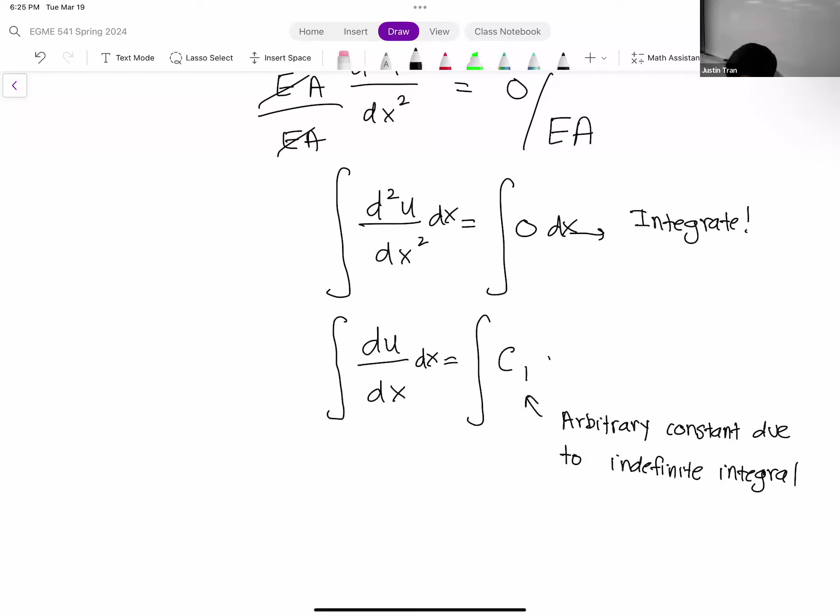All right, so we're going to do that again because we don't quite have u of x yet. So we're going to apply another integral here with respect to x. And so on the left-hand side of this expression, we're going to have u of x. And then on the right-hand side, we have c1. The integral of a constant is just x, so we have c1x. And then just like we did in the first step, we're going to add an arbitrary constant, c2.

I'm starting to get competitive, I feel like I'm competing against what's happening out there.

All right, so that's our general solution. For cases where you don't have a body force and you don't have a varying cross-sectional area or varying properties, your solution is very simple. You can just simply integrate and get your solution like this. Any questions on this so far? Okay. All right, but we're not quite done yet.

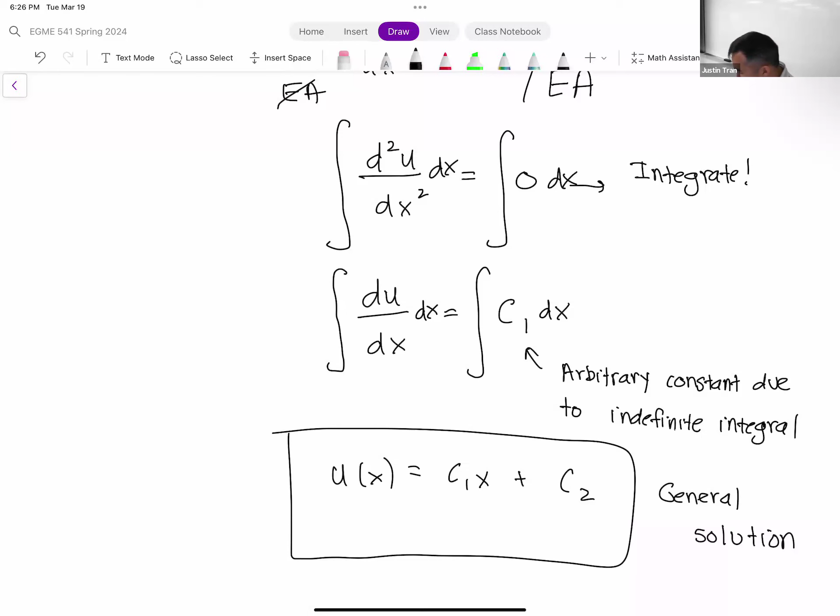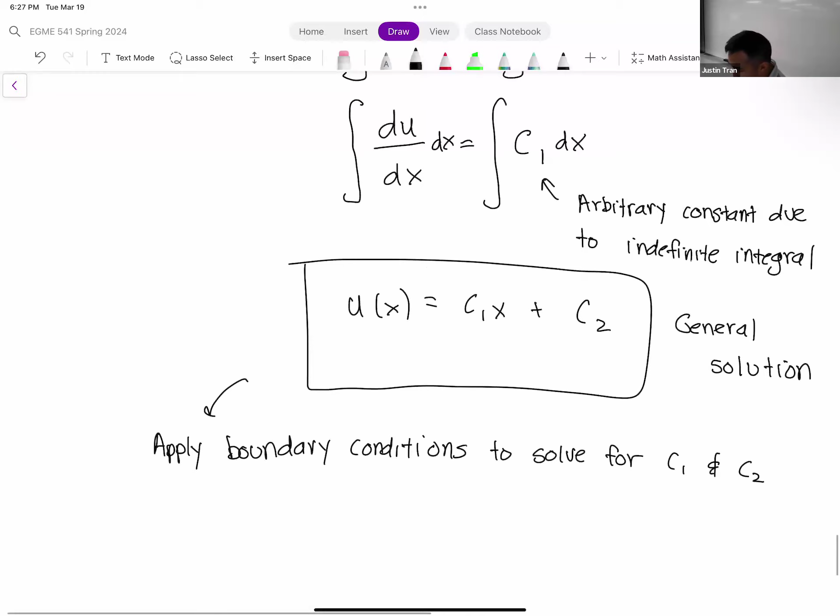In order to get our full solution here, we have to apply our boundary conditions. The reason we're applying the boundary conditions is we need to solve for values for C1 and C2. So let's go ahead and do that. We have our two boundary conditions here. The first one is that u of 0 is our Dirichlet boundary condition. Since we had a pin support on the left-hand side of our bar, that means u of 0 has to equal 0.

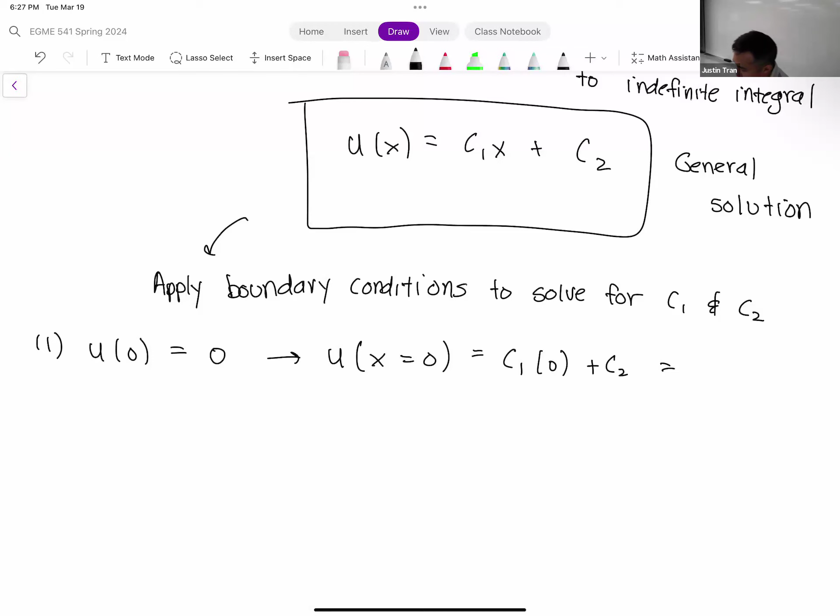So let's go ahead and apply this boundary condition. Let's take our general solution, u of x, and plug in x is equal to 0. Everywhere we see x, we're just going to plug in 0. So we have C1 times 0 plus C2, and according to our boundary condition, this is equal to 0. The C1 times 0 is going to cancel out, and what we get from here is that C2 is equal to 0.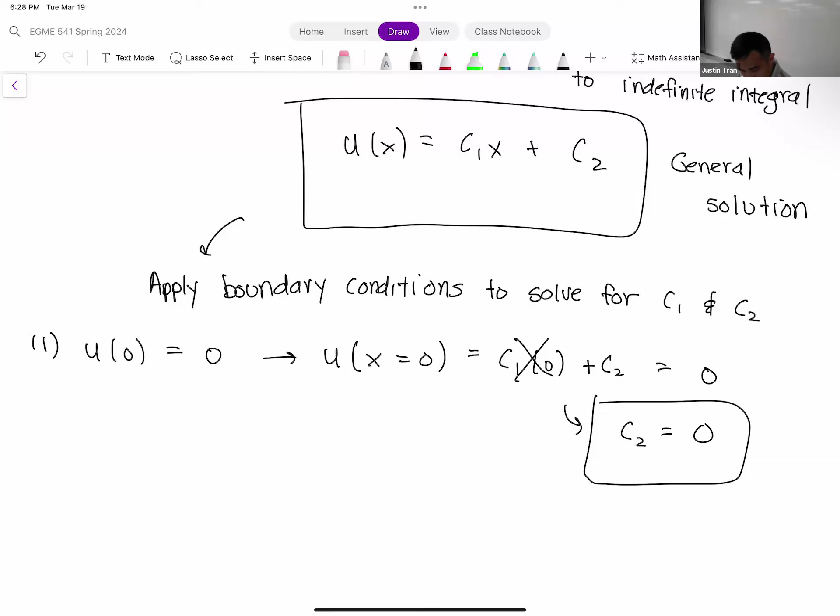Then we have our other boundary condition, which is our Neumann boundary condition. This boundary condition is applied on the right-hand side. And so we're going to flip the sign of our typical boundary condition, which is E du dx. Our Neumann boundary condition here is applied at x is equal to L, so we're going to plug in x is equal to L there. And this is going to be equal to, normally it's minus t bar, so that was our boundary condition before, but since our force here is tensile, we're going to flip the sign. So this is going to be equal to a positive t bar. Our t bar in this case is 100 Pascal.

All right, so let's go ahead and plug in. To get du dx, we have to go back into our solution here. We know that du dx in this problem is equal to just C1. That's what we obtained midway through our solution. And we multiply that by E. E here is 100 kilopascal. We multiply that by our solution derivative, which is just C1.

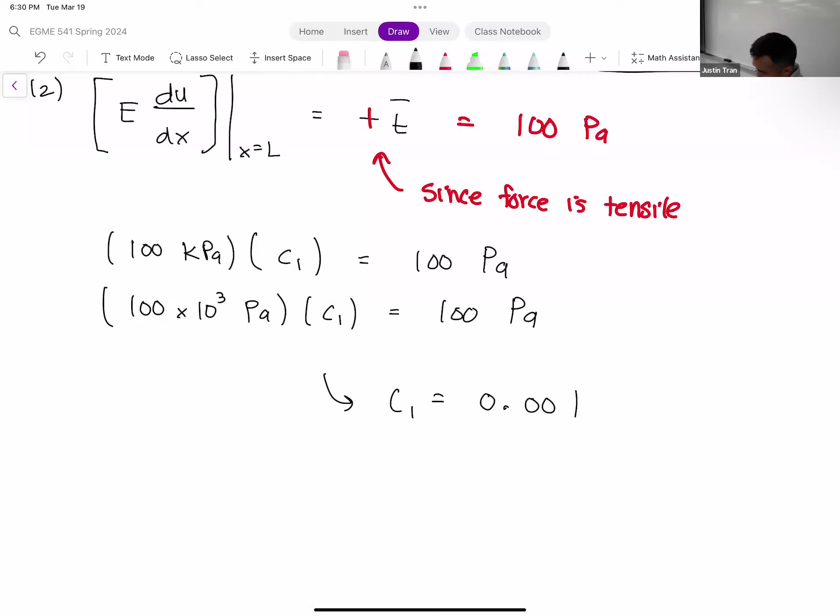All right, so let's go ahead and plug both of those in. And so we plug both those in, we get u of x is equal to 0.001 x. Okay, and so that's our strong form solution. So our strong form solution is you take your differential equation, you solve for its general solution, and then you incorporate the boundary conditions.

All right, any questions on how we got to this point here? Okay. All right, so we have about 15 more minutes today. And so what I want to do with this last time is to just introduce the weak form to you, and then we'll go through the main derivation next time.

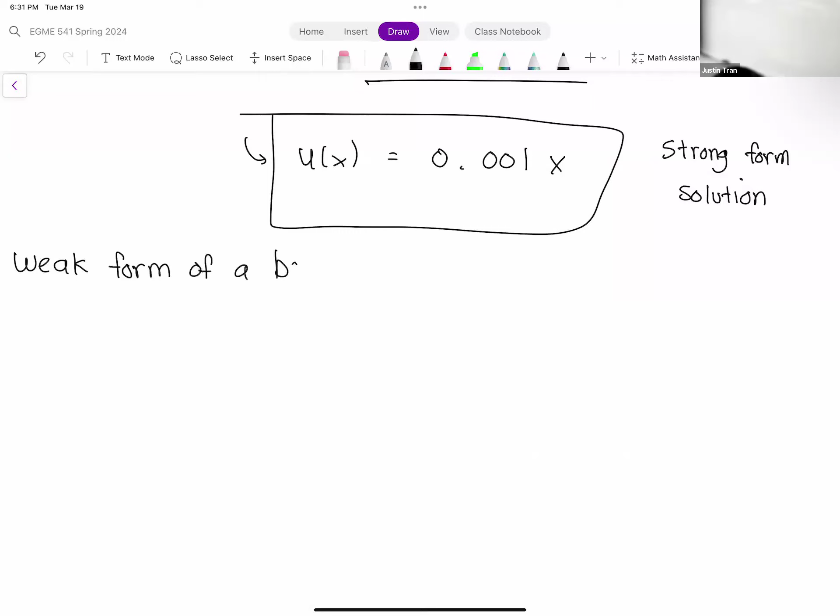So first thing I want to say is that, even though we call it the weak form, there's nothing inferior about it. So I think, just by the terminology of strong versus weak, you would think that strong form is superior or has better qualities. It's nothing like that. So the weak form, if you solve it exactly, gets you the same solution as before.

I understand why they named it like this, but at the same time, it's terrible for your first understanding, because there's a lot of connotation, there's a lot of assumptions that come with the word weak. Okay?

So there's nothing really weak about it. The reason it has that term is that you can enforce certain conditions in a weaker form. And that means basically in a more approximate form. And it's also given that name because it's a lot easier to find approximate solutions to a weak form than it is to a strong one, right? But it has nothing to do with accuracy or usefulness. It's just the name. Right? So weak form is nothing wrong.

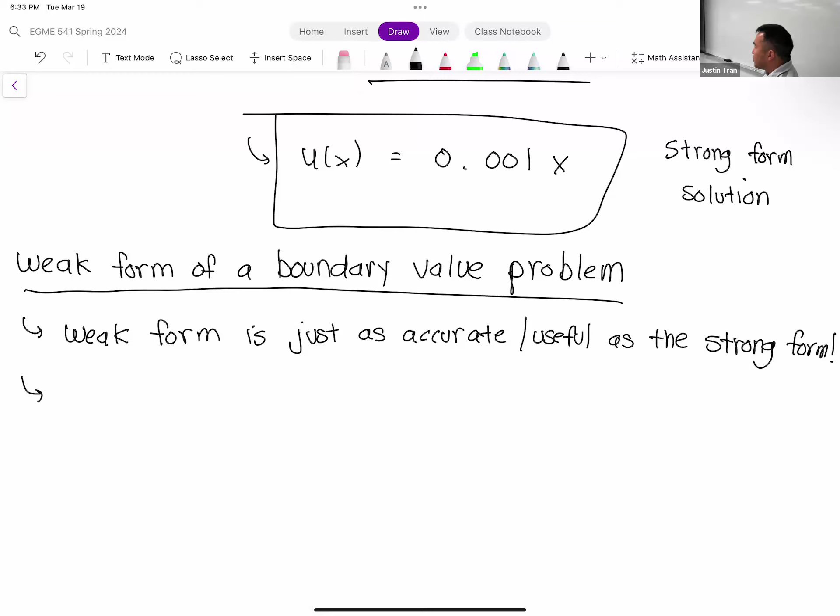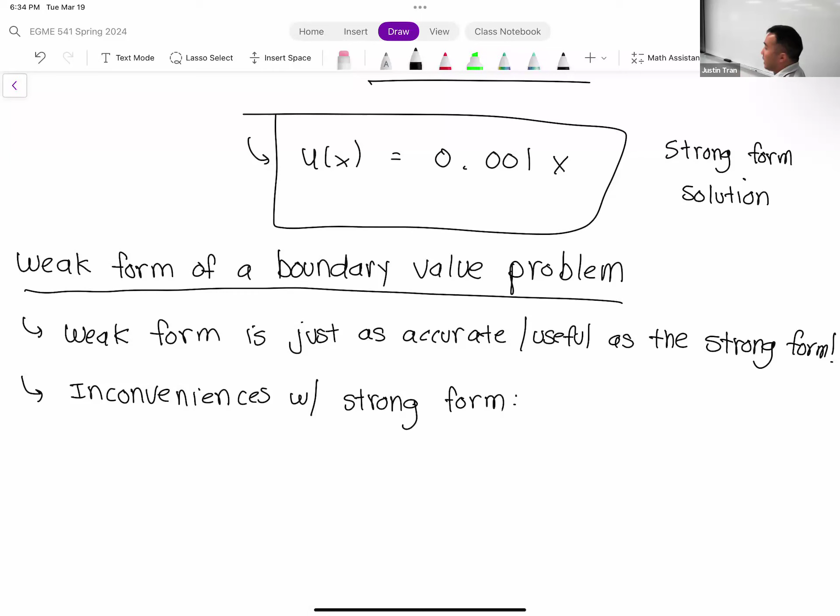Okay. And so with that, I wanted to highlight, even though the strong form, I think, is what people typically learn when they first learn about differential equations, there are some drawbacks, or I would say some inconveniences with the strong form. These don't really seem like that big a deal for 1D problems. We just did an example just now. But just know that a lot of these problems get exacerbated when you get into higher dimensions and higher order equations as well. Okay. So there are two main issues, I'd say. Not really issues, but they're inconveniences. Okay?

So it would be great if there's a way that we can solve a similar problem that gets us the same solution, but with a lower order derivative. So that's the main thing, right? Or that's one of the main things: can we weaken the order of the derivative and still get the same solution? Number two. So the other thing that's a little bit inconvenient about the strong form is how we apply the boundary conditions.

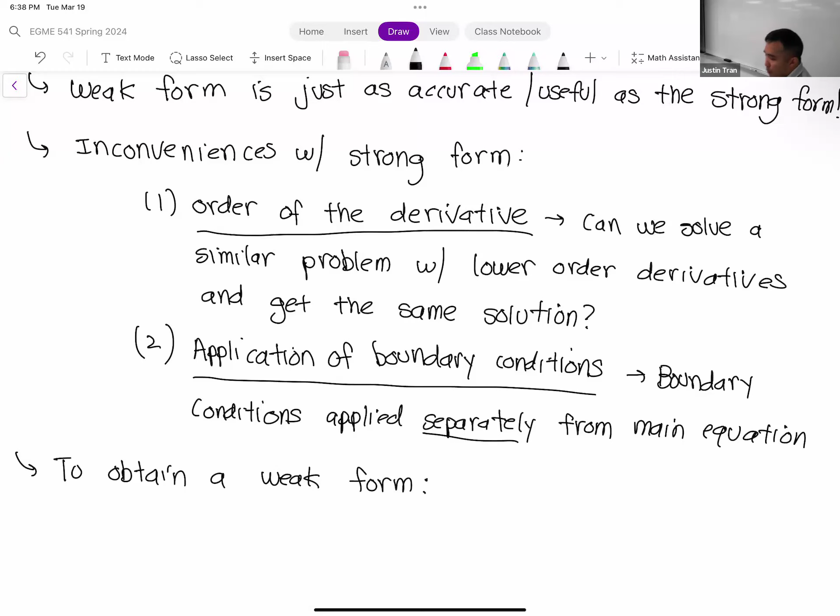To obtain the weak form is a two-step process, involving two steps that you probably would never have thought of before. The first step is to multiply your entire governing equation by something called a weighting function.

Can't tell if they're doing karaoke out there or something, or if it's just that.

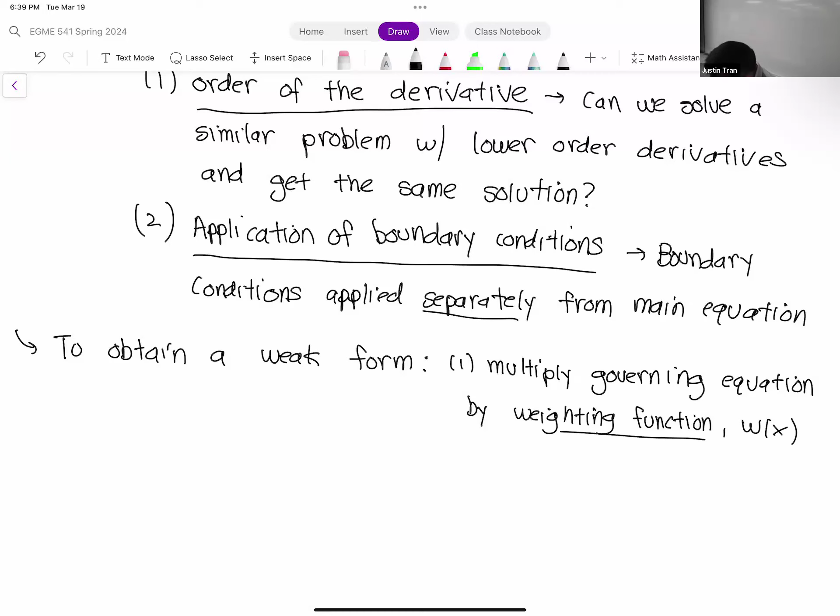We'll call our weighting function w of x. Let me show you what that looks like. For our differential equation here, we have d/dx of E times A, du/dx, plus b of x equal to 0.

What we're going to do is multiply this entire equation by w of x. That gives us w of x times d/dx of E times A du/dx, and we'll distribute that w of x to the b of x body force term as well, so we have w of x, b of x. All that's equal to 0.

So we're going to multiply by this weighting function. You probably have a lot of questions about the weighting function, but we'll save that for next time. The second thing we're going to do is integrate this entire equation over the problem domain.

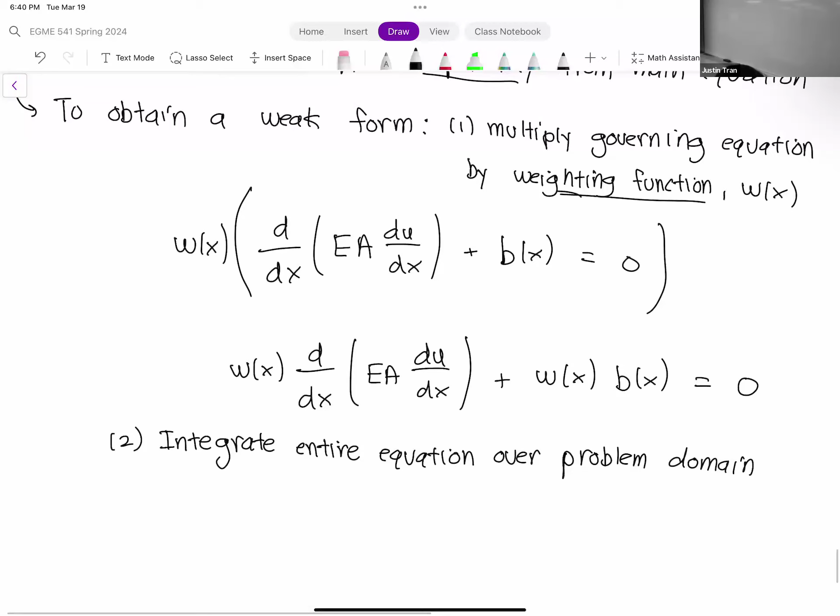If we do that, we have two terms here, and we can integrate them separately. So we have our first integral from 0 to L of w of x, d/dx of E times A, du/dx, dx, plus the integral from 0 to L of w of x, b of x, dx. All that's equal to 0.

The next step, which we'll save till next time, is the methodology we're going to use to reduce the order of the derivative. If you look at this first term, this chunk I've highlighted in red is essentially a second order derivative.

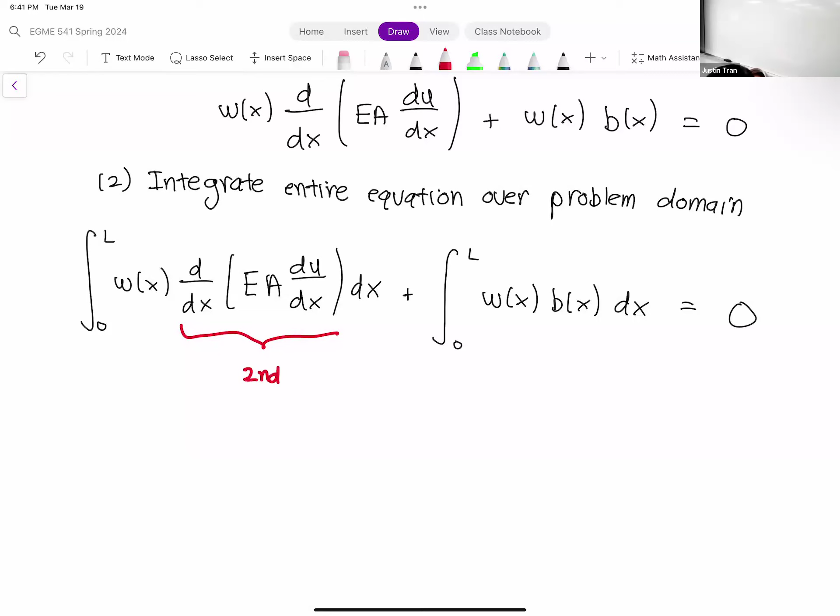Because if you think about our example where E and A are constant, that d/dx gets applied to du/dx. So what we can do now that we have our equation in this form is apply something you probably thought you'd never see again after Calc 1 or Calc 2: integration by parts.

Integration by parts is going to allow us to essentially move some of the derivatives around. We're going to move one of the derivatives from u, and put that derivative onto w, our new friend the weighting function. This seems like voodoo magic here, but trust me, it's going to make sense. It's just that today's not the day for it because we're almost out of time.

Any questions on this before we wrap it up for today?